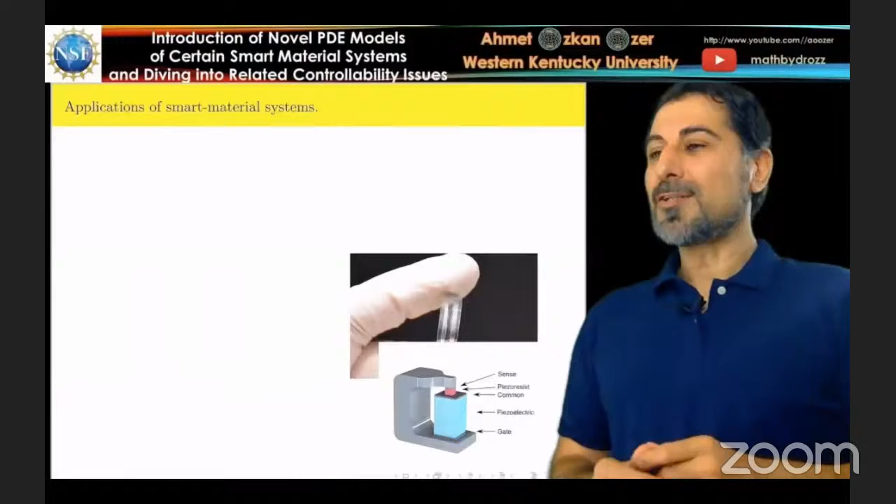The second example I want to share with you is the piezoelectric transistor developed by the Watson Research Center at IBM. It works on a novel principle. Essentially, you apply the electrical input that is converted to an acoustic pulse by the piezoelectric element here.

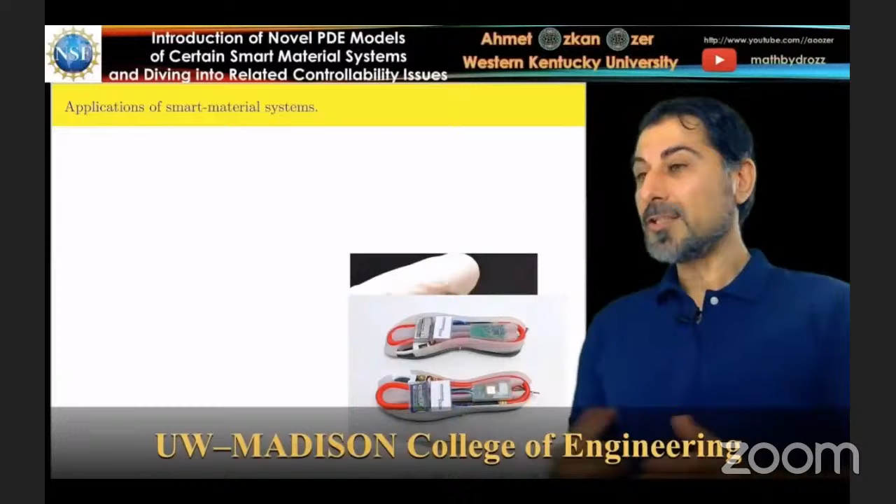Here is another application of piezoelectric smart material systems. We have a shoe sole with an embedded energy harvester with the battery and electronics, all integrated in each sole. When you walk, this harvester is going to harvest energy and power up certain electronics needed. This is developed by University of Wisconsin-Madison researchers, and in fact it's a startup company.

All right, here's the outline of my talk. In the first part, I'm going to focus more on the modeling aspects of piezoelectric beam models, and these are novel beam models. Hopefully some of you would be interested in working on those models in the future. In the second part, I'm going to talk about the controllability and stabilization results, recent results.

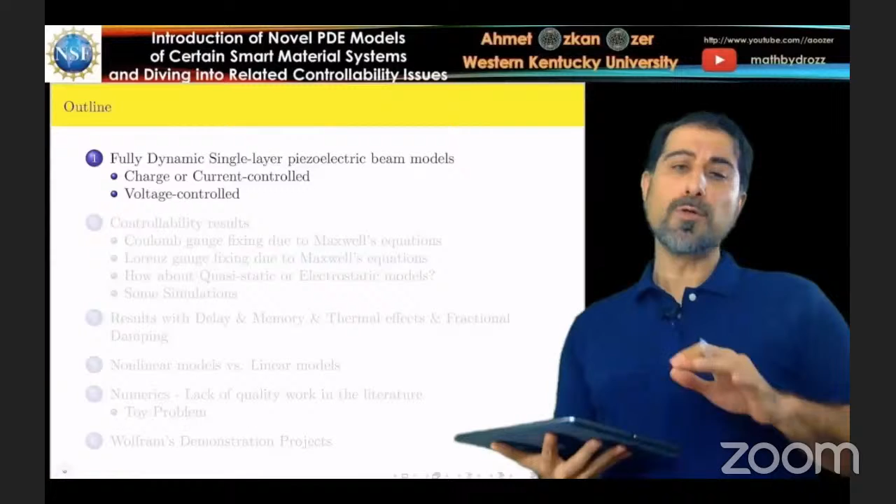In the third part, I'm going to talk about different scenarios where we have a delay in the feedback controller, or memory in the material, or thermal effects added to the game, or fractional damping added. In the fourth part, I'm going to work on nonlinear models when you assume large displacement assumptions, so we have nonlinearity added to the PDEs, and I'm going to compare that to linear models.

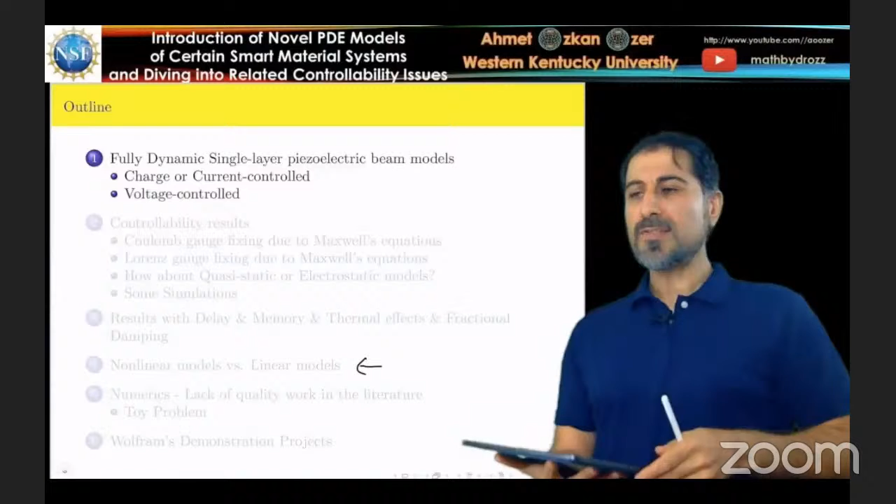And I'm going to talk about some numerics that I have been recently working on. Hopefully, if time is left at the end, I'm going to talk about the Wolfram demonstration projects that I have been working on in the last 2 years with my undergraduate students. Two of our works are already published at the Wolfram site. All right, let's get started.

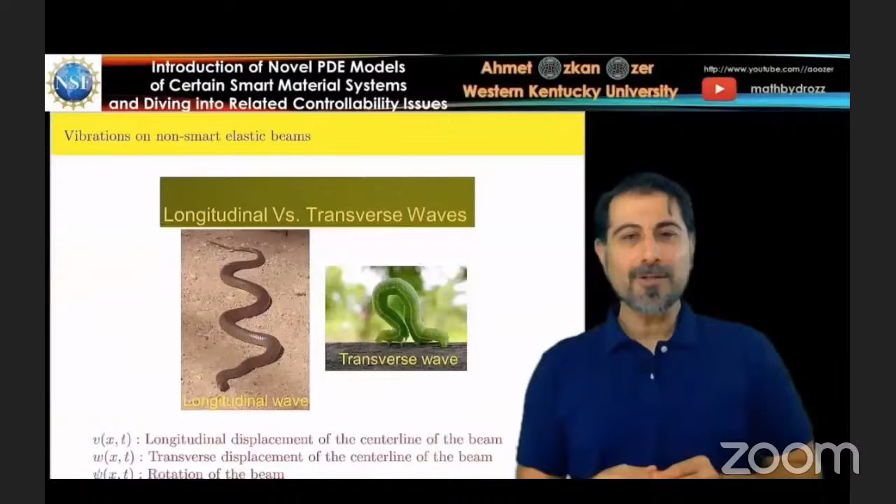Let's first talk about vibrations on non-smart, simply elastic beams. We have three major variables. V denotes the longitudinal displacement of the center line of the beam; it's essentially the stretching type motion. W represents the transverse displacement of the center line of the beam, which is essentially the bending motion. And psi is the rotation of the beam. From this moment on, dots are going to represent time derivatives and primes are going to represent space derivatives.

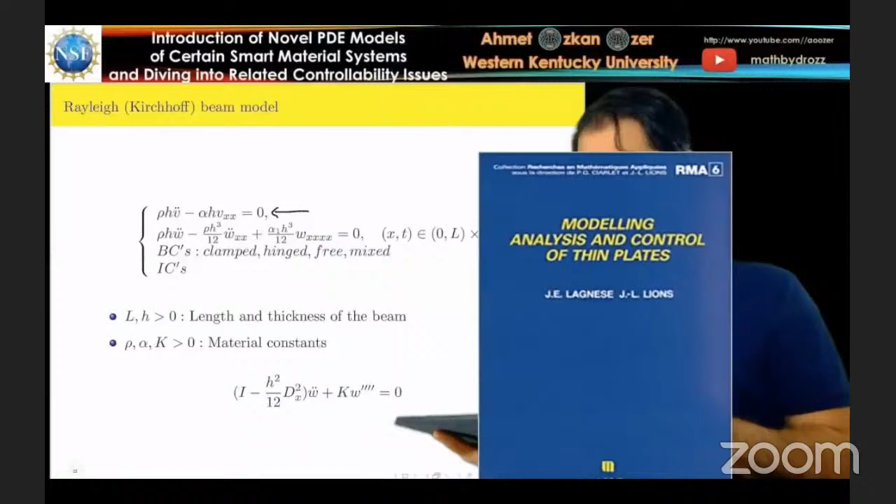All right, let's start with the Rayleigh beam model, or so-called Kirchhoff beam model. We have one equation, one wave equation in fact, describing the longitudinal type motion, and you have the beam equation here representing the bending motion.

These are completely decoupled because we're using the small displacement assumptions. In other words, we're using the linear theory, and we have boundary and initial conditions of your taste. This is a beam of length L and thickness H, and we have material constants, completely positive.

The W equation can be rewritten in this form, and you have this differential operator applied to the second time derivative, and this brings extra difficulty in terms of controlling these beams. This difficulty is just because of the rotational inertia term that I'm circling out over there.

So that term is simply discarded in engineering applications, which takes you all the way to the so-called Euler-Bernoulli beam model. So the only difference is that you have no rotational inertia term here. There's another model you may have heard of, called the Mindlin-Timoshenko beam model.

So essentially you have a bunch of wave equations representing the longitudinal bending and the rotation of the beam. These are all coupled, and you have the same type of positivity for the constants, as you can see.

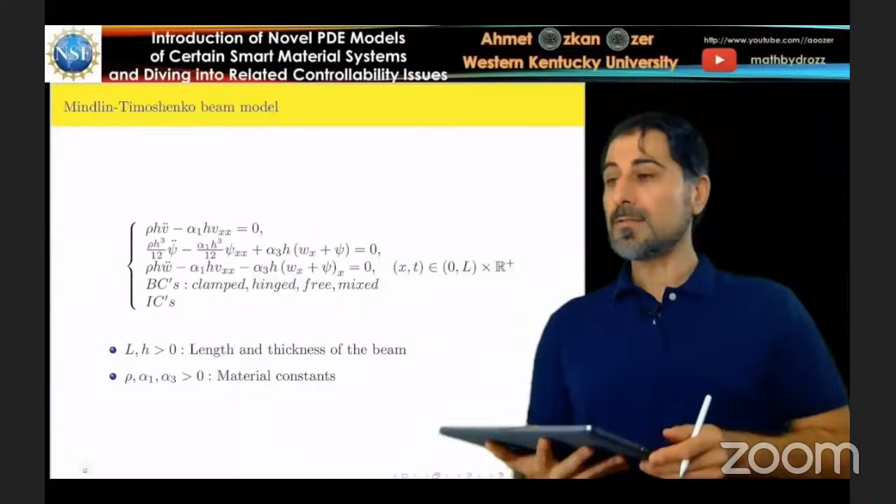Now I want to talk about the smart elastic beam model. So you have a piezoelectric beam model, which is essentially an elastic beam having electrodes at the top and bottom. If you connect the electrodes to a circuit, you can start supplying voltage, charge, or current to the electrodes, and depending on the amount and the type of the electrical charge, you can actually shrink or extend this beam. And in fact, the opposite direction can also happen.

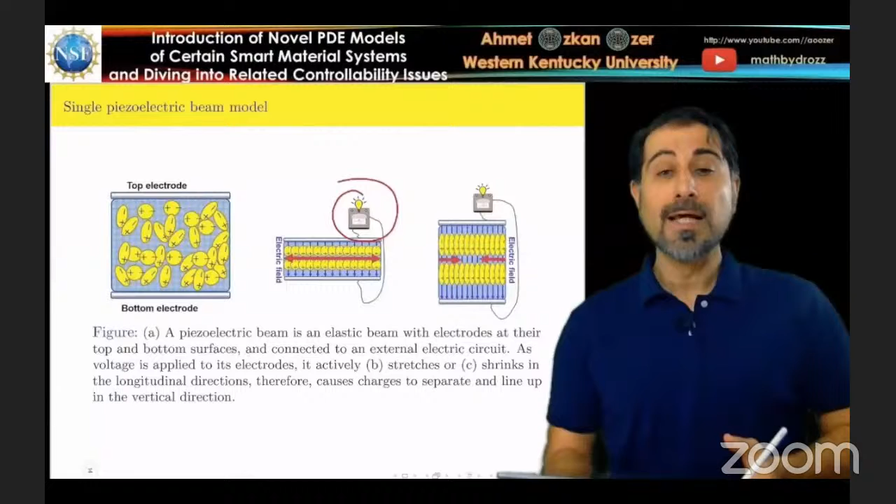So you can actually compress these materials or apply external force to generate electricity, so that these materials are used as actuators and sensors. After introducing the piezoelectric beam here, my research just starts here.

Now there are a lot of questions coming up. How do we actuate these beams? Are we going to supply voltage, charge, current, or even mechanical force? Remember that when you apply force on the piezoelectric beam, we generate electricity. So what is the best actuation?

There are some answers for that. Traditionally, piezoelectric beams are actuated by voltage. Why? Because it's easy to implement, you have simpler circuit design, and it's cheap—that's a great advantage. And if you look at the pioneers in the field, including NASA, they all use piezoelectric beams actuated by voltage.

And how about the choice of models? Should we go finite or infinite dimensional models? Can we use basic circuit models, RLC type? Are we supposed to use linear or nonlinear models? How about the electrical hysteresis?

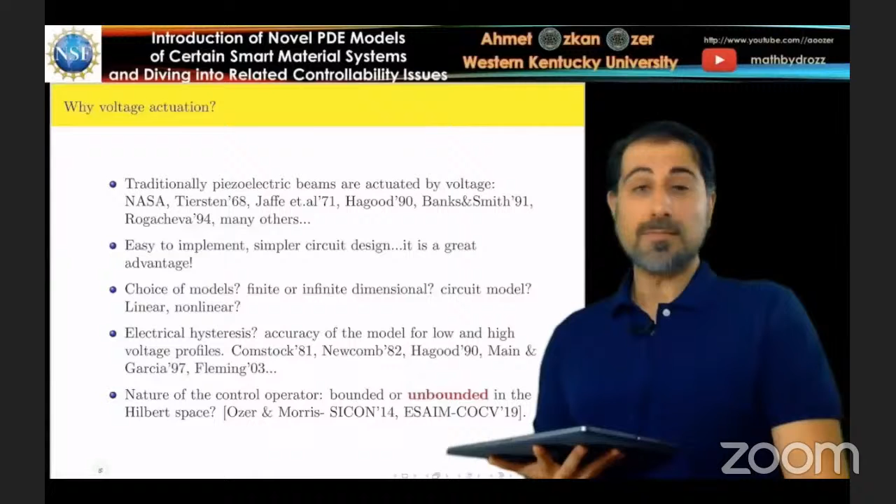So essentially, this is the electrical nonlinearity that happens to a material. There's also mechanical hysteresis—lots of hysteresis are observed, especially when you actuate these materials by voltage. And how about the nature of the control operator? Because we're all doing control theory of PDEs.

So are we supposed to have bounded or unbounded control operators in energy space, essentially? This is also another question we have to ask ourselves, because in certain cases you have bounded, in other cases you have unbounded control operators. That depends on the choice of the electrical input.

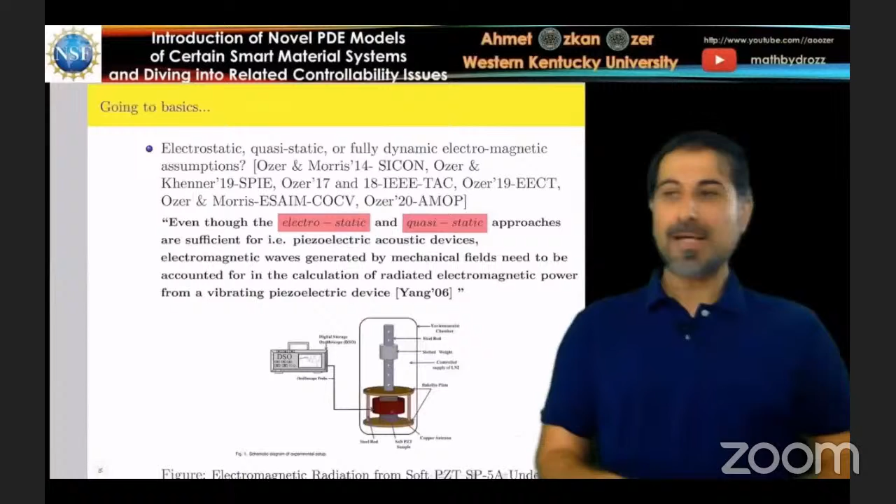On top of all these questions, there's another question we should elaborate on—we have to go to the basics. How are you going to model the electromagnetic effects? In fact, how do you model the interaction of the mechanical vibrations with the electromagnetic effects? Because piezoelectric materials are sort of combining those effects.

So at best, you can go with Maxwell's equations for the electromagnetic portion of the modeling, but then you have three different assumptions: electrostatic, quasi-static, or fully dynamic. I was reading Yang's book, and he has a very good quote here: even though the electrostatic and quasi-static assumptions are more than sufficient to describe the vibrations in certain devices...

...in practice, there are some other devices, like piezoelectric acoustic devices that you can see in the diagram here, where electromagnetic waves are generated by the mechanical fields, and these are supposed to be accounted for. If you use the electrostatic or quasi-static assumptions, you completely ignore those electromagnetic effects. Essentially, you have to incorporate these effects in your model by adopting the full set of Maxwell's equations.

There's also another paper by Yang, published in 2017, where he talks about the fact that at present there is only limited understanding of the electromagnetic effects generated by acoustic vibration, because of the complexity of the electromagnetic effects being blended with mechanical vibration. So even though for certain devices it's known that these effects are very major, people—especially engineers—choose to discard those effects because of the complexity they add to the modeling process.

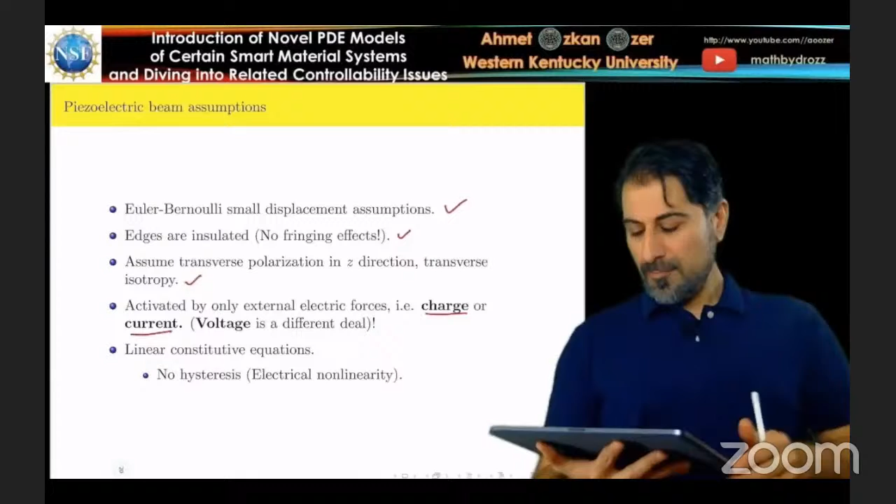And voltage is a totally different deal. I'll show you the model for the voltage, but it's a different deal. And we're going to use a linear constitutive equation, so we're going to have a linear model essentially.

Here's the full set of Maxwell's equations coming along with boundary conditions. I'm going to use either charge applied to the electrodes type boundary condition or current applied to the electrodes. You can also apply voltage, as I said, but that causes a lot of hysteresis. Electric potential being equal to voltage is the boundary condition corresponding to that, but I'm not going to consider this during the modeling process. I'm going to show you the model if you assume the voltage boundary condition.

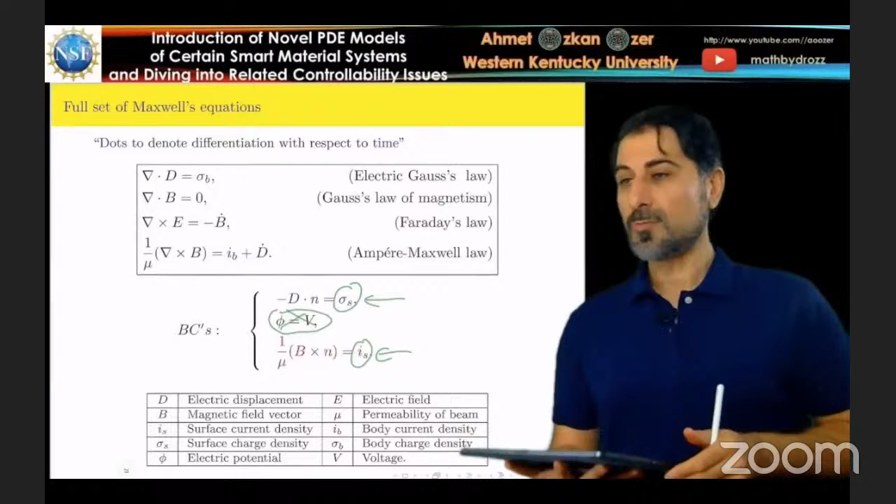Here is also the assumptions that I mentioned earlier. So are we going to use electrostatic, quasi-static, or dynamic? Let me just quickly explain what electrostatic means.

So you have the magnetic field and the time derivative of the electrical displacement, body current or body charge completely discarded. And here the electrical field is the negative of the gradient of the electrical potential.

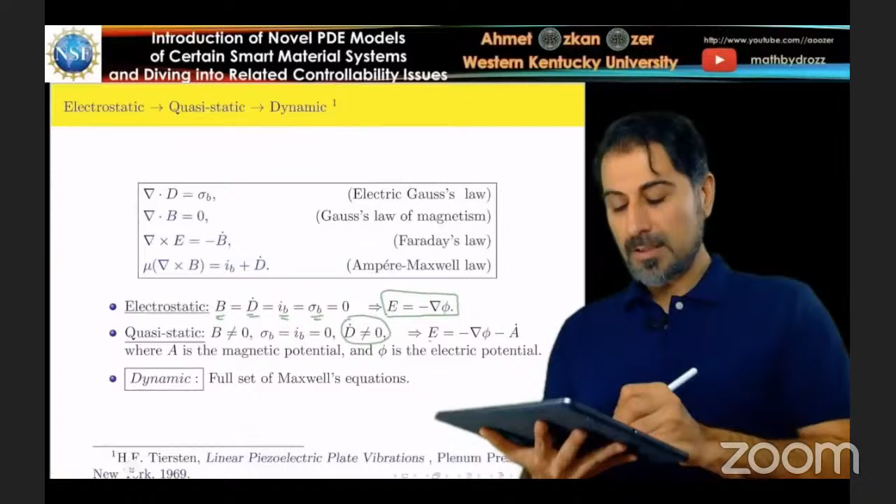And you can use quasi-static. Here the magnetic effects are not completely discarded because the time derivative of the electrical displacement is essentially not equal to 0. And even in this case, you can write E in this form, negative of the gradient of the potential minus the time derivative of the magnetic potential.

And what we're going to do here is we're going to assume the fully dynamic model. That means I'm going to use the full set of Maxwell's equations to start with. But I just wanted to show you the differences between all 3 assumptions here.

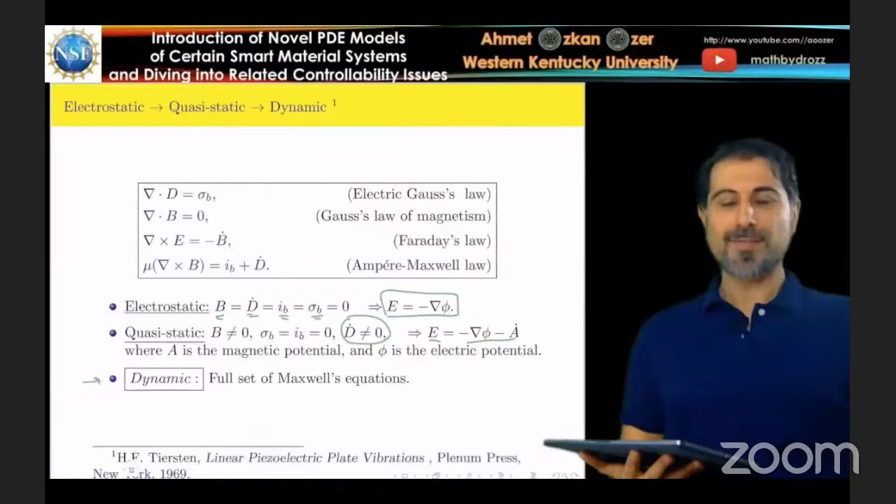So after adopting the full set of Maxwell's equations, we need to know how the stress and strain are related to electrical displacement and electrical field. This is a well-known linear constitutive relationship.

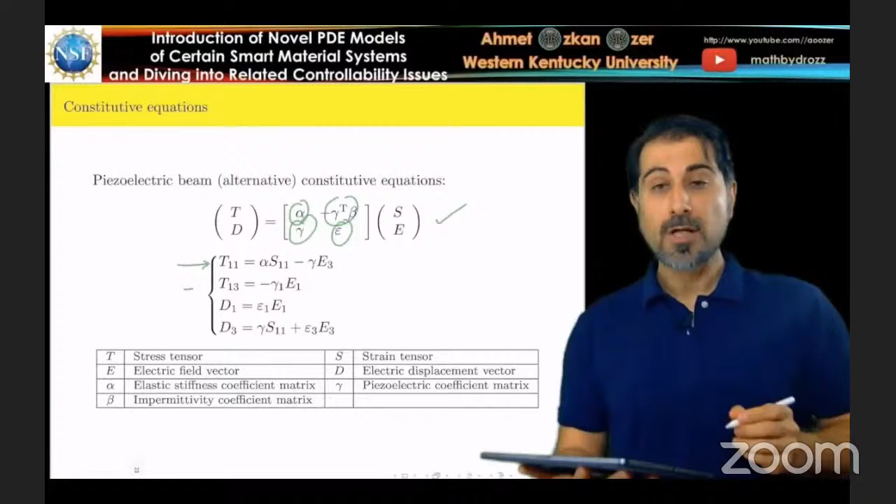So these are all, by the way, matrices, sub-matrices, but essentially stress and strain have 6 components. But we're going to only assume, since we're using beam theory, the stress in the x direction, and then the stress in the z direction. And we also have the electrical displacement in the x and z directions.

So now we know how stress and strain are related to the electrical displacement and electrical field.

All right, we have the final assumption before we wrap everything up. We're going to assume that the electrical potential and the magnetic potential are quadratic through thickness. Briefly, this is for involving the induced electrical field effects.

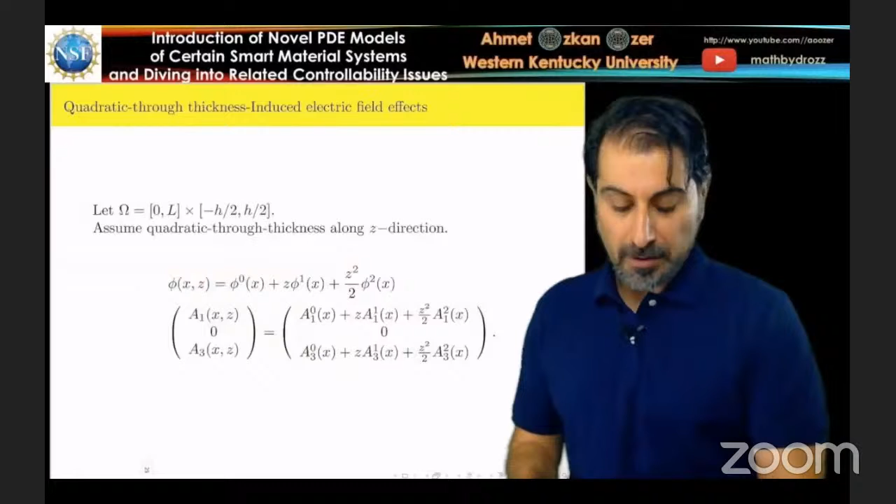So what we're going to do next is write down the Lagrangian. We're going to write down the kinetic energy, potential, electrical, magnetic energy, together with the work done by the external forces. This is represented by W.

We only assume that there is just charge, applied charge or current to the electrodes, and we have the surface continuity conditions, and we have all pieces of the electrical and magnetic fields to be our admissible displacements, and we also have V and W, longitudinal and bending motions.

And if you wrap everything up with better notation, we have a set of stretching equations. There's also another set for the bending equation, but since the current or charge control do not affect those, I don't mention them here. One catch here is that the top equation is the wave equation describing the stretching of the beam, the mechanical vibrations of the beam.

And you have the second equation for the electrical potential. As you see, charge comes into the game together with the Dirac delta operator. So you have a boundary control.

And if you assume the electrical current as your input, you can see that this is a nice Heaviside function. So it's a bounded controller popping in for the very first component of the magnetic field.

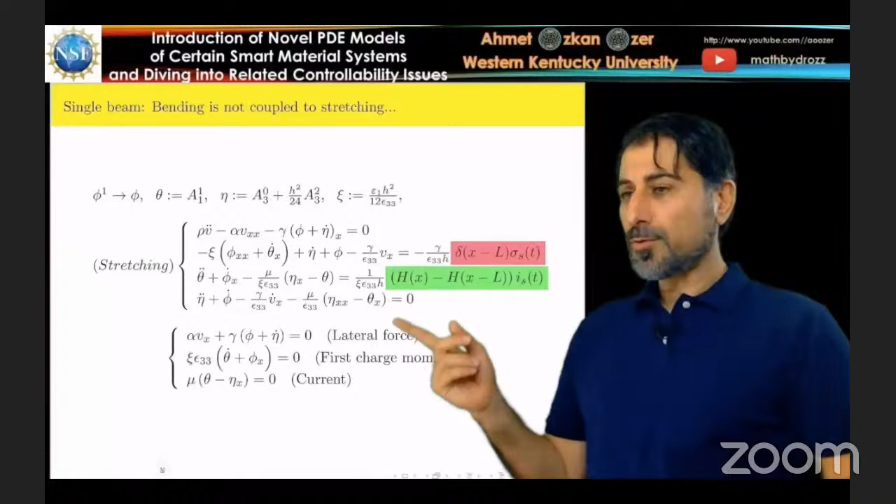Here we also have the boundary conditions: lateral force, first charge, moment, and current. These are natural boundary conditions. And next, there's simply no way to use the current in the variational approach if there is no magnetic effect.

So this is the importance of adding a full set of Maxwell's equations here. And the bad news is that the system is not well posed. Essentially, the Lagrangian is invariant under certain transformations. You can find the details in those papers.

And what is the remedy here? If you worked with Maxwell's equations involving all the electromagnetic potentials, you have to rely on a certain gauge. It's called gauge fixing, to make the system well posed. But there is also the physics meaning of choosing a gauge. Essentially, if you use a Coulomb gauge, you assume that electromagnetic waves travel at infinite speed. And if you use the Lorenz gauge, electromagnetic waves travel with finite speed.

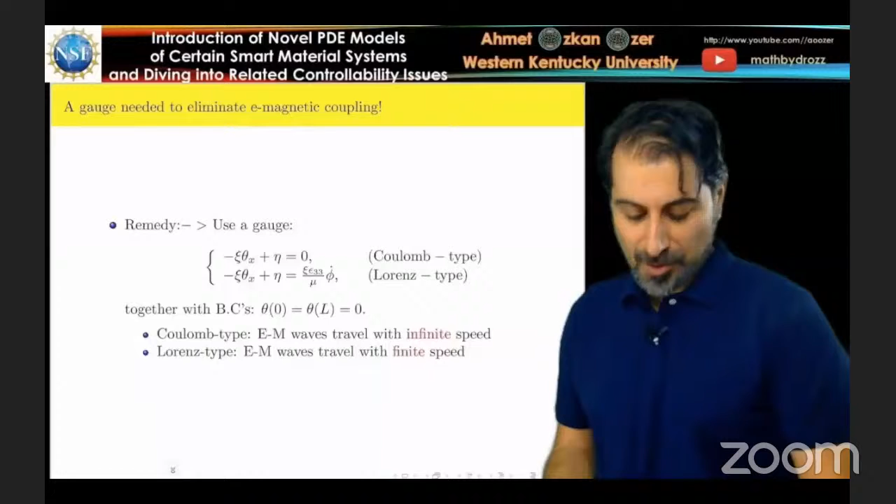So what is the reflection of that in the modeling or in the PDE here? If you use the Coulomb gauge, this circle term is going to be 0. So that's going to make the electrical potential equation not a wave equation, but just an elliptic equation that you can solve for phi.

And in fact, if you solve that for phi, let me show you what you got here. So defining this P xi operator, the inverse of this differential operator, you can eliminate the phi equation. So you have all wave equations here, and the phi equation is blended in through the other equations. So you have the charge, as you see popping up here with the Dirac delta operator as it was before, and you have the Heaviside function coming along with the current control.

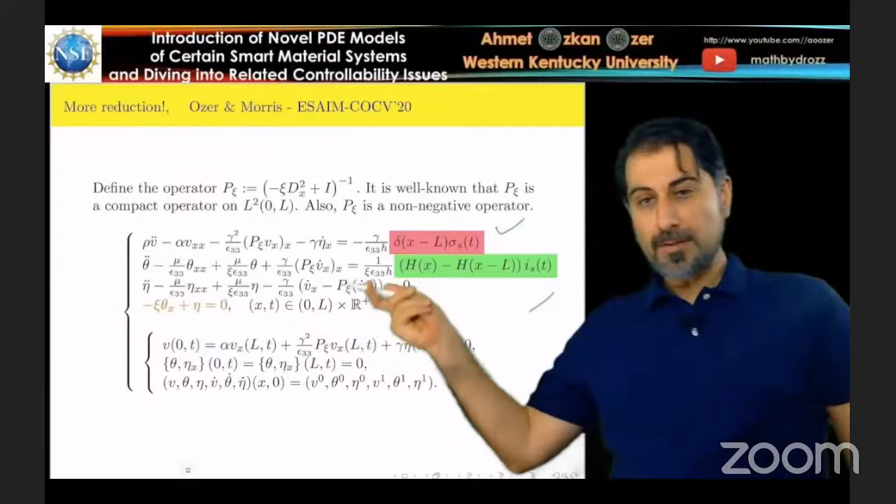This tells us that charge control is an infinite dimensional control, or in other words, an unbounded type controller, let's put it that way, in energy space. And the current control is bounded because it's just popping up as a nice Heaviside function on the right hand side of the equation. The Coulomb gauge here is also blended into those equations, and it's an extra equation that you have to always keep in mind, especially when designing the energy space.

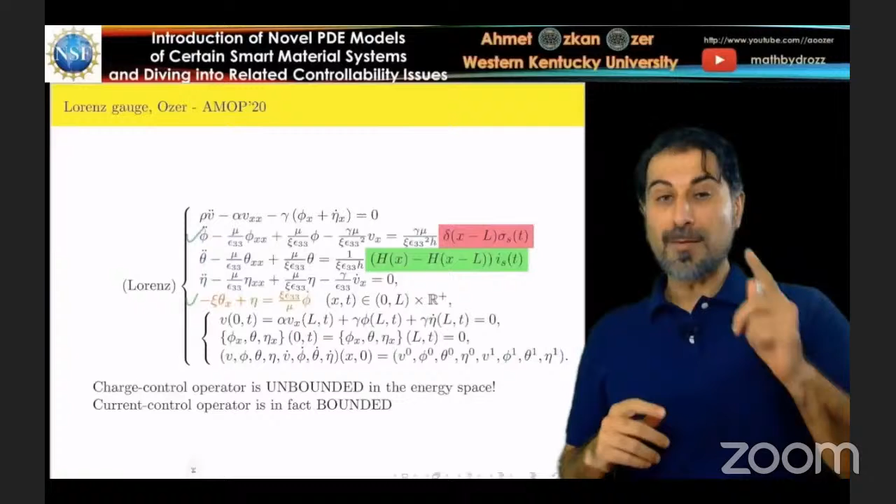And what happens if you use the Lorenz gauge? Well, then we're going to have a wave equation for the electrical potential as well. So there's one more equation, and here is your Lorenz gauge added extra to the equation. The deal is the same in terms of boundedness or unboundedness of the charge or current control operator. So you have the charge control unbounded and the current control bounded.

So far we only talked about a single piezoelectric beam, and there are other models, obviously 3-layer designs where the piezoelectric beam is one of the layers, or even multi-layer designs, but because of time limitation, I can't talk about those. I'm going to put a link down in the YouTube video so you can actually check those models if you're interested.

All right, let's change gear a little bit. I'm going to talk about the controllability results for the Coulomb gauge and Lorenz gauge models, and I'm also going to talk about the quasi-static and electrostatic cases.

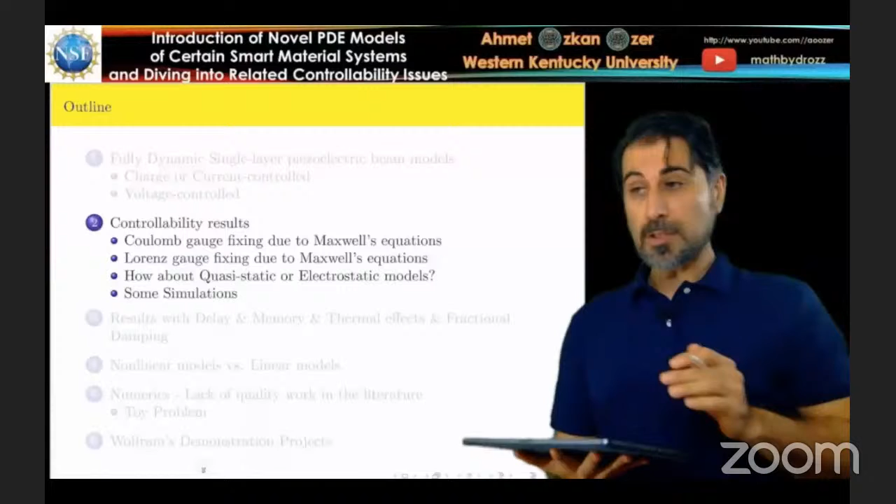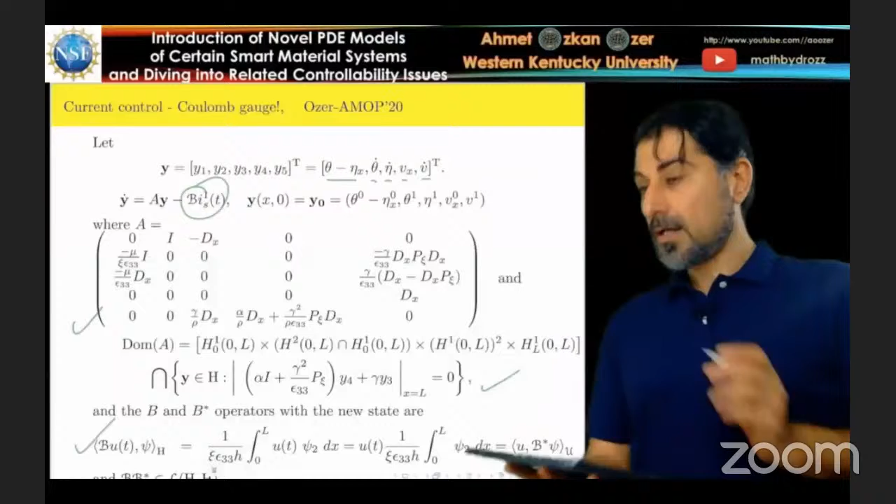States are going to follow the energy description here, so we're going to define those states, 5 states. And here, as you see, the current control comes into play like this. By the way, I'm just talking about the current control at this moment when I write down the state space formulation. And we have this matrix A, and we have the domain that also involves all the boundary conditions and the Coulomb gauge, and you define the control operator and the observation operator, which is B star.

B star is going to be our measurement. All right, here are some technical results. If you're interested, you can check the paper.

The most important part here is that with the choice of H, we can show that A star is exactly equal to negative A. We have a unitary semigroup, and we have the well-posedness result in H.

Right now, we're looking at the time derivative of the energy, and we can observe that this is current times the integral term over there. That integral term corresponds to B star feedback, and what we do is just feed it back into the state space formulation, and that B star is very physical. In fact, that's the magnetic current in the X direction.

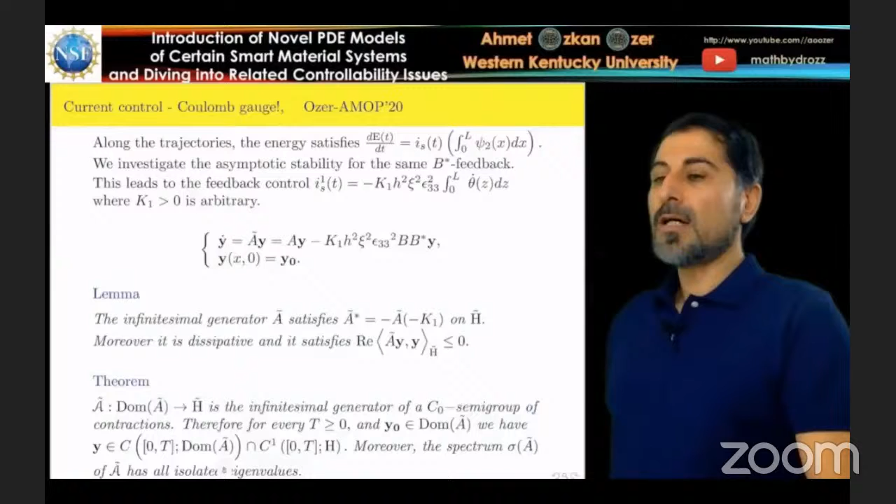So we have a dissipative system, and the closed loop system is in fact well posed. And we have all isolated eigenvalues. All right, now we have a well-posed system.

It's time for proving the lack of stabilizability. And for real tau, we define all of these constants A, B, C written in terms of the material parameters. And we have A1 and A2 written in terms of A, B, C.

So we have a very technical result, and if you're interested, please refer back to those papers here. So you have, if A1 and A2 are of special forms, 2m pi over L, 2n pi over L, m and n are integers, and m squared plus n squared is strictly greater than that constant here, then we have the lack of asymptotic stability.

In fact, in the engineering literature, it's the minimum you ask for when you talk about stabilizability. And we went further and proved that the system A, B, with B being the control operator, is not asymptotically stabilizable, not just by B star feedback, but by any other bounded state feedback.

And it's just because the current control produces a bounded control operator, and there's no way to push all the eigenvalues to the left half plane, which is pretty much expected. And we use Benchimol's theorem to prove it.

And how about the charge actuation? I didn't want to go through the details of that in terms of the state space formulation, but if you use the B star measurement, in other words, that's totally mechanical.

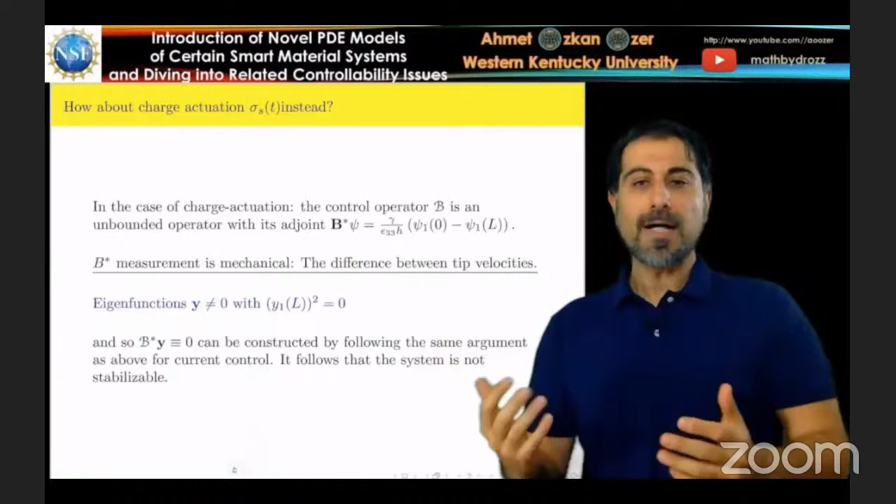So you're talking about a piezoelectric beam, so you should normally control an electromagnetic quantity and measure the same way, but if you go with charge, you in fact have to measure something mechanical, which is the tip velocity, to show that you have the same type of lack of stabilizability result.

And how about the Lorentz gauge? I would just say that the setup is pretty hard. And again, if you're involved in Maxwell's equations with the potentials, proving well-posedness for a Lorentz gauge is a big deal. I worked on this problem for a long time, but eventually I got it published, and it's well-posed.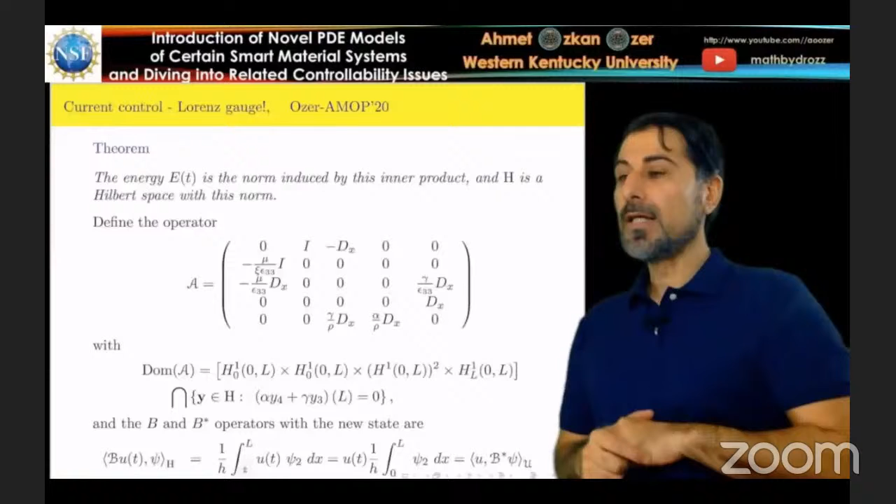But you have to redefine your state, and you have to sort of convert the Lorentz gauge into a Coulomb-like gauge, and you define the inner product and the space accordingly. I'm going to skip those details here, but just show you that B star is also calculated through that.

We have the well-posedness result with the new state. In fact, we had to embed the new Coulomb type gauge by converting the Lorentz gauge into our Sobolev space. And again, that was quite technical, so please refer back to my paper here.

And similar to the Coulomb gauge model, you can define A, B, C, and you can prove a very similar result of the lack of asymptotic stability. And in fact, there's no way you can stabilize this model by any state feedback.

Okay, how about the electrostatic or quasi-static cases? In fact, that's pretty interesting, because if you don't assume the full set of Maxwell's equations, life is so easy, because you have a single wave equation, as you see here, and it's controlled by the charge controller.

Or you can use the circuit equation, as you see that the time derivative of the charge is the current, so you can actually use those separately, and you can easily prove that both models are at least asymptotically stable, but obviously the model controlled by only charge is exponentially stable.

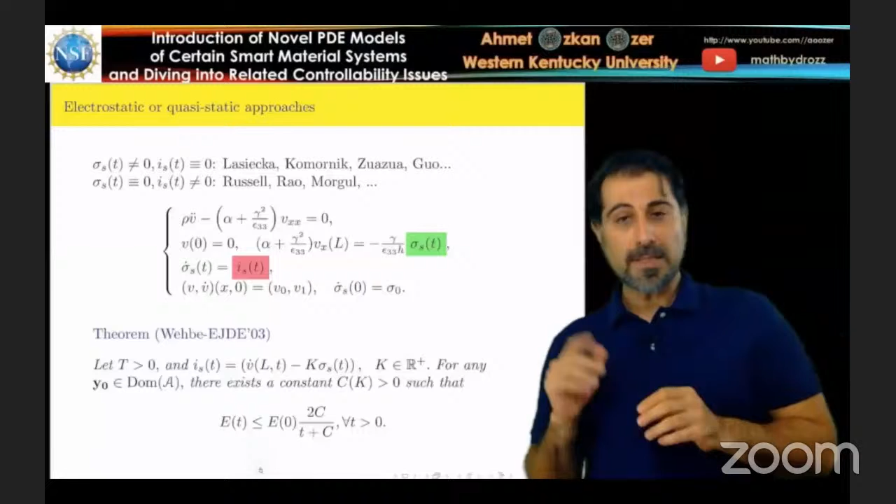And you can refer back to this result of Wehbe for the polynomial stability in the case of current. Remember, in the fully dynamic case, we don't have the stabilizability, but here we have at least some sort of stability, which is good in terms of practical purposes.

And this table sort of summarizes everything that we have so far. You can go with electrostatic, quasi-static, or dynamic assumptions of the Maxwell's equations.

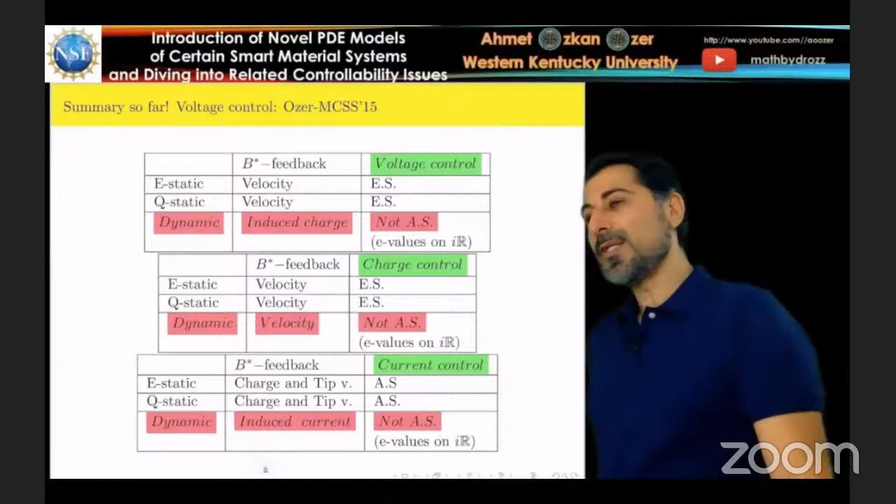If you go with voltage control, you measure the induced charge, and it's not asymptotically stable. But if you go with electrostatic or quasi-static assumptions, everything is good—you even have exponential stability. In charge control, it's the same deal: with dynamic approaches, you don't have asymptotic stability. This lists all the weirdness coming along with choosing different assumptions in the modeling process, and in terms of control, you have all different types of controllability or stabilizability results.

All right, let's change gears a little bit. In this part of the talk, I'm going to mention related results involving certain other physics into those PDEs.

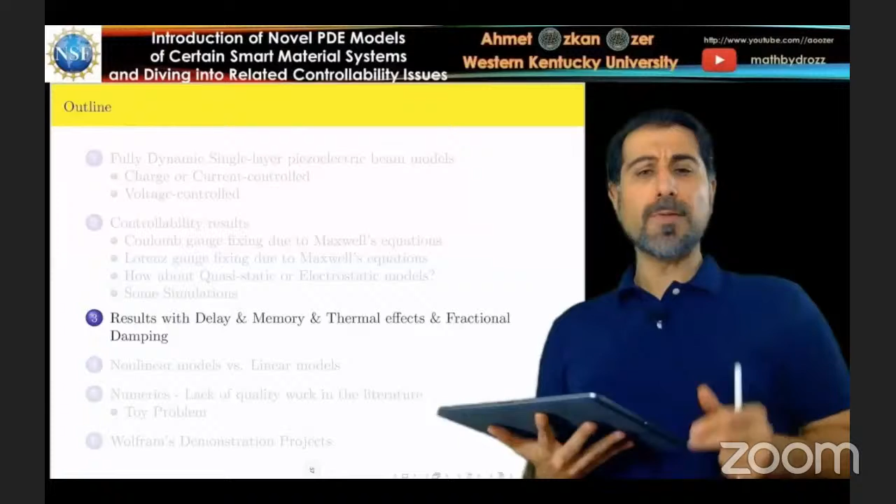All of these models are novel, and that's why we wanted to analyze them with delay, memory, thermal effects, and fractional damping. The slides I'm showing won't contain mathematical results since this is submitted work, but it may give you an idea of what problems I've been working on. You may add different types of delays—distributed delays, or delays in the mechanical boundary condition or the charge boundary condition—and analyze what's at stake in terms of stabilizability. Time delay is important, because even a small perturbation delay in the output measurement causes instability. We submitted multiple papers involving these different types of delays.

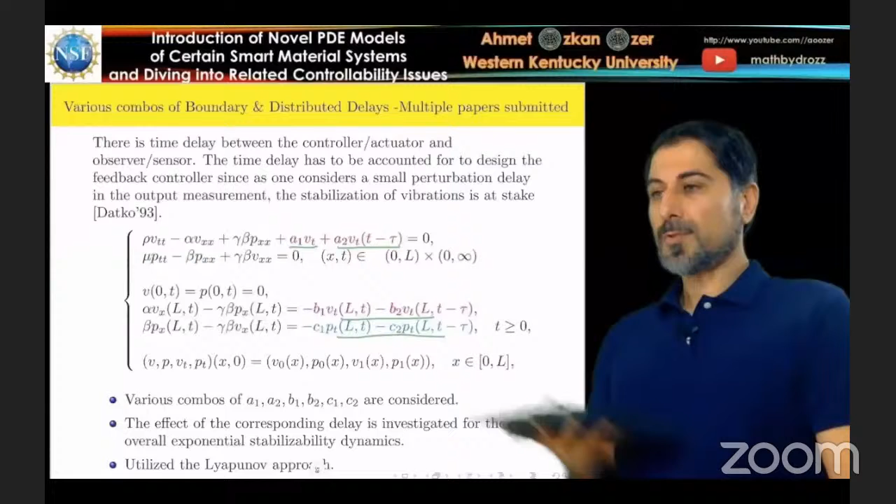We got really nice exponential stability results following certain papers and results in the literature, and we utilized a Lyapunov approach for this type of model specifically. This is a model corresponding to the voltage control case, and for current charge control, this type of delay was never studied before.

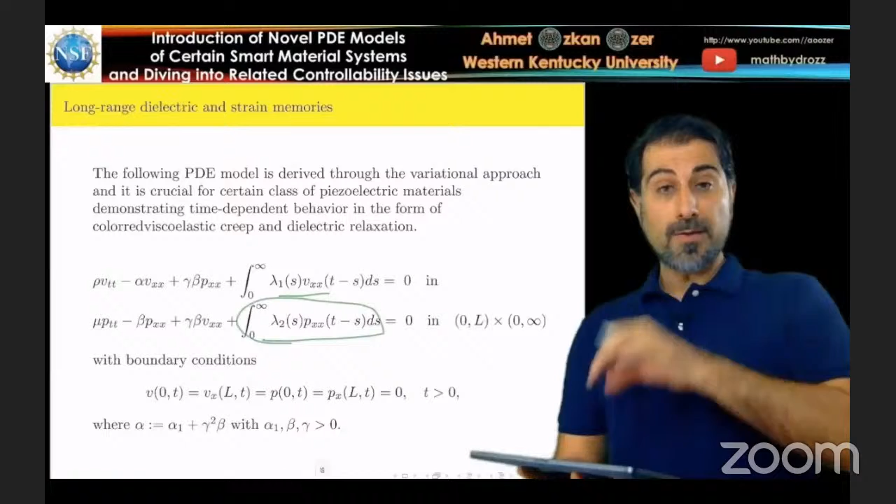Next is how about adding memories to each equation—so you have the mechanical memory, and this is an interesting behavior. We know the elastic memory, but we don't know much about the creep or dielectric relaxation, and you can't really find models in the literature addressing that in the infinite dimensional setting. So this part of the model is very important—this was never studied before with this much rigor blended into the PDEs.

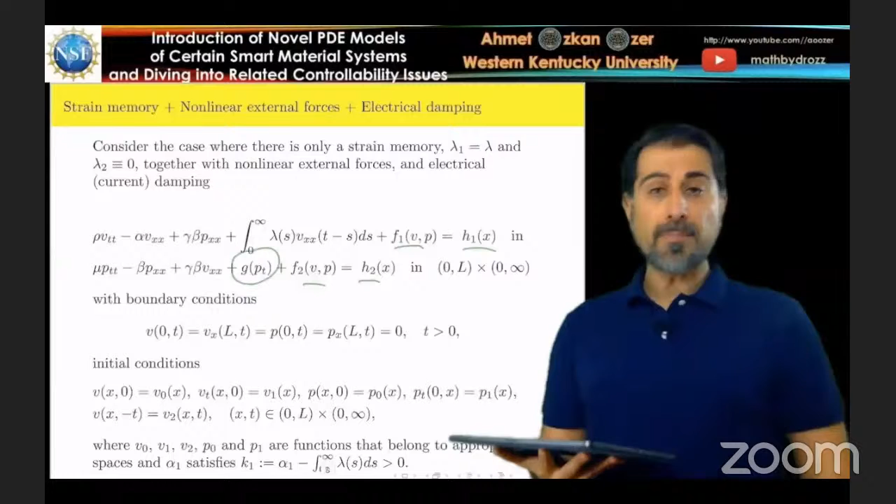This is another problem we worked out. There are different versions of it, but we added external forces, source terms, and some kind of electrical damping into one of those equations. We proved, under certain conditions, that the dynamical system associated with the solutions of the system allows us—using quasi-stability theory—to get the existence of global and exponential attractors. Again, this model has never been considered in the literature due to the existing complexity of the PDE models for piezoelectric beams. This is the first attempt at adding the memory term into the piezoelectric beam equations.

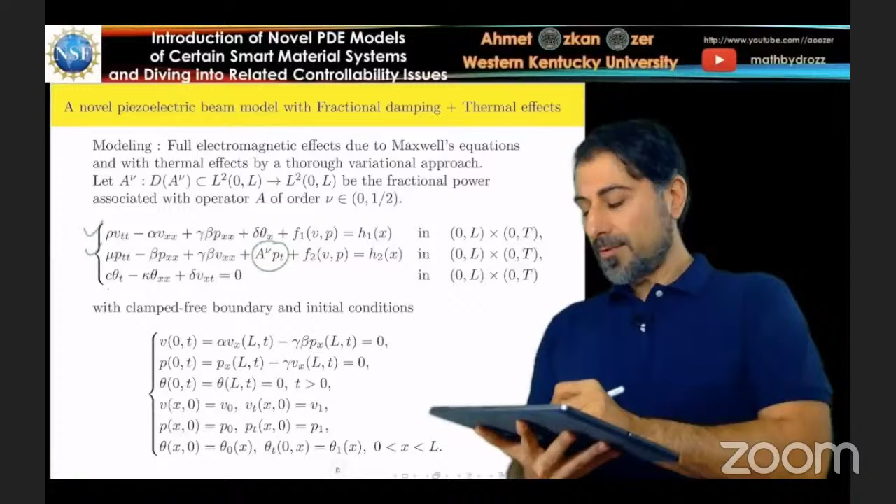And what if we have fractional damping and thermal effects? This is also not studied at all. We essentially took the piezoelectric beam model actuated by voltage, added fractional damping and magnetic damping into the P equation, and added thermal effects coupled to the piezoelectric beam equations. We proved a lot of stuff here—this is a long paper, by the way.

We studied the long time dynamics and proved that the dynamical system generated by the system has a smooth global attractor with finite fractal dimension, via quasi-stability theory. We got the existence of the exponential attractor and a global attractor under perturbation of the fractional exponent. This is also a joint work—we submitted it, and it's under revision, so I can't share all the details, but I can briefly explain what is accomplished in the paper.

In this part of the talk, I'm going to mention nonlinear models. I'll only consider the voltage control case to show what's going on. Before I start, I want to point out that nonlinear effects are crucial in modeling because they explain certain behaviors, especially for energy harvesting purposes, so these effects should be accounted for.

When I started modeling this, I wanted to use large displacement assumptions due to Mindlin and Timoshenko, and Euler-Bernoulli. For the electromagnetic effects, I involved everything due to Maxwell's equations. If one wants to get down to a quasi-static or electrostatic model, there's a way to eliminate certain variables to get down to PDE models for those cases. When I looked at modeling papers producing distributed parameter models, I can highlight the work of Kugi and Schlacher—they interestingly got a bilinear control system very similar to what I got here, but they assumed electrostatic assumptions.

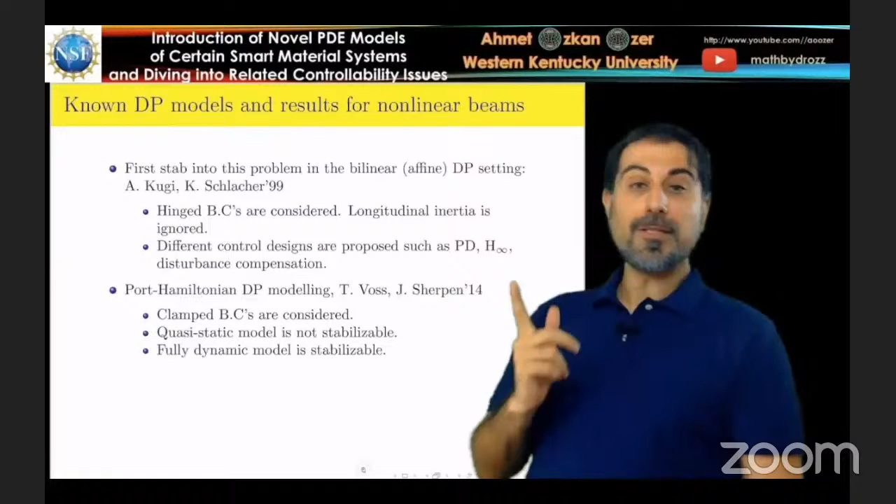They got hinge boundary conditions, and the longitudinal inertia term is sort of ignored. That's pretty interesting because involving nonlinearity, one observation is that the longitudinal motion is strongly coupled to the bending motion. So if you discard the longitudinal inertia and design the controllers, that's a big reduction. And there was another paper by Voss and Sherpen.

They used clamp boundary conditions, and they showed that with only one controller, the quasi-static model is not stabilizable. With two controllers, the fully dynamic model is stabilizable. This is a good result because this is the most rigorous paper I have seen so far involving nonlinearity.

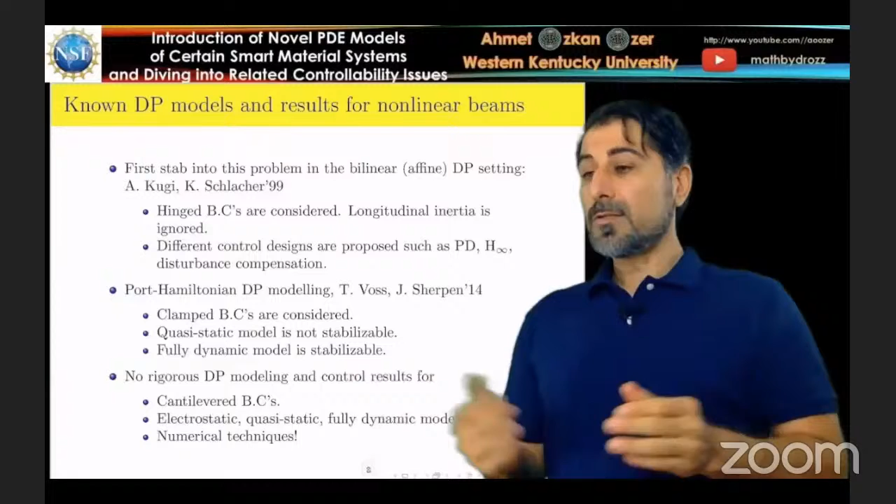Unfortunately, there are no other distributed parameter modeling and control results for cantilevered boundary conditions involving electrostatic, quasi-static, and fully dynamic models. Because of the time limitation, I can't show you everything. I will only show you the electrostatic case here, just to show you what's going on.

This is a very novel model. You probably haven't seen this model anywhere. Please check this out if you're interested.

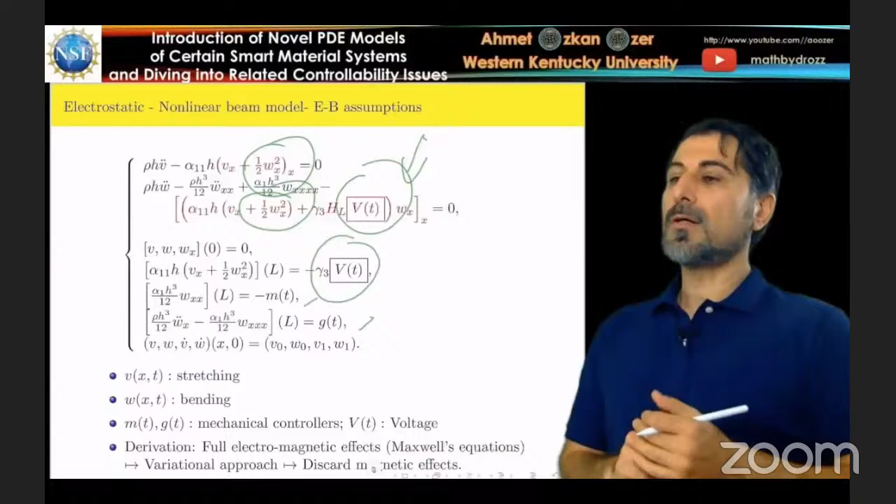What we did here is that we also added some controllers, moment and shear, transverse shear controllers for the bending equation. So how do you stabilize even the electrostatic case?

Well, we look at the B-star type feedback, and that B-star type feedback is interesting here. So you have the tip velocity, and you have the time derivative of the integral of Wx squared. That's an important term. That's the effect of nonlinearity, coupling the V and W equations.

And we choose classical B-star feedback controllers. You have a dissipative system, but essentially this part is important because the tip velocity could be the negative of this component, so that could zero all the effect of the feedback for the voltage. So you're going to eliminate that case.

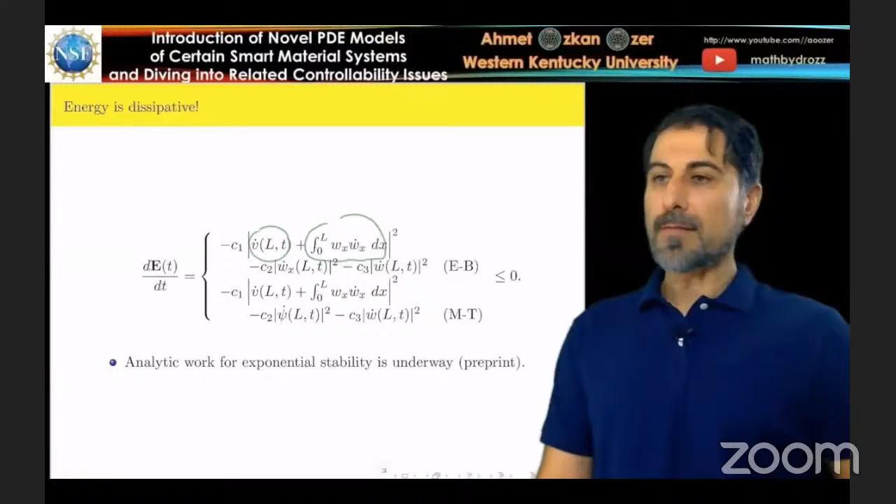So that means there are some other non-trivial equilibrium points going on here, and the analytic work is underway with collaborators, and I can't show you the results here because of the same reason.

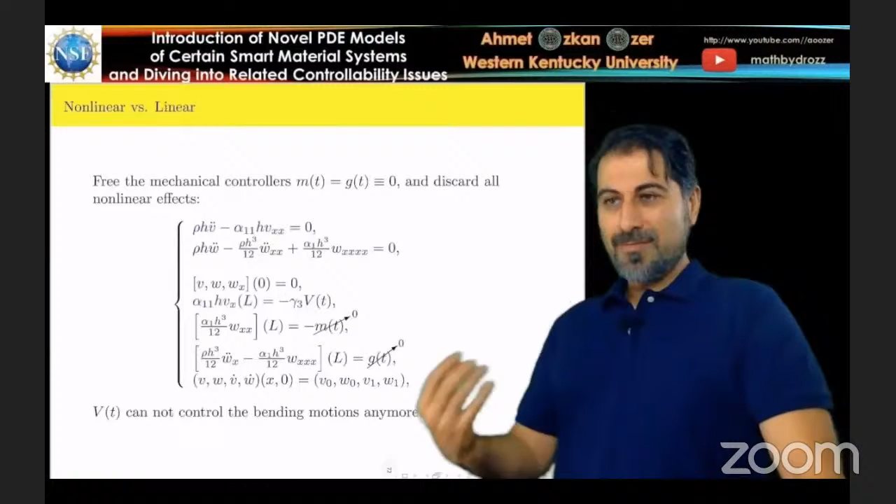So if you free the mechanical controllers and discard all the nonlinear effects, you have a perfectly decoupled equation, as you see that the voltage only controls the longitudinal motion but not the bending motion. So again, nonlinearity is important because voltage affects both stretching, longitudinal motion, and the bending motion altogether.

And if you consider the Euler-Bernoulli model, not the Mindlin-Timoshenko, you can put it in the state-space formulation. By the way, you can choose the classical states to start with, but there's also different choices of states. For example, I can change this to V sub x, 1/2 Wx squared. So I got a different state space formulation, and I can prove different results for that.

But we prove that this system here is a nice boundary control system. One of the catches here is that the voltage control pops here in a bilinear way. This was the observation in Kugi, and we got the same observation here.

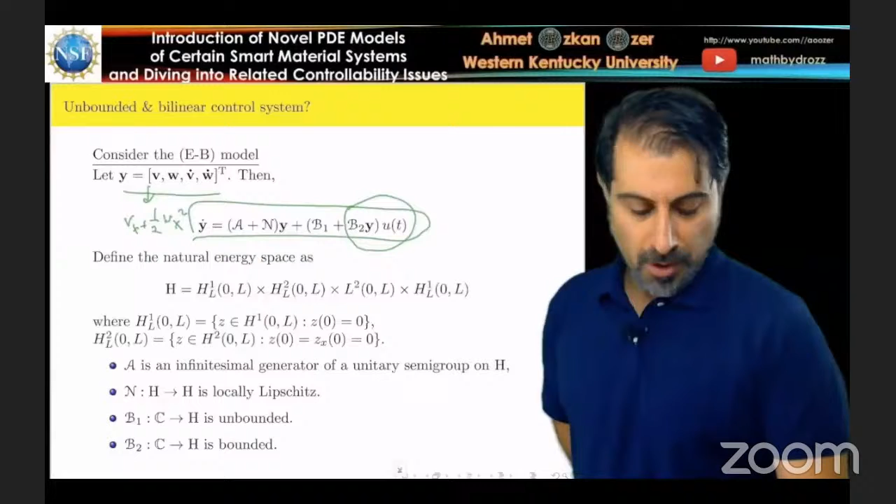Again, there's not much work done for this type of systems. And if you're interested, this could be an interesting mathematical problem. We already started working on it, and we got some preliminary results, but I can't share those with you at this moment. But there is a lot of open problems here.

So we proved the well-posedness and exponential stability, it's sort of proved. It's a preprint right now. Different combos of boundary feedback and distributed damping are in consideration right now. So if you're interested, we can do some joint work in the near future.

And we got the numerical work, which I'm going to show you in a little detail here, but there's supposed to be lots done in the near future. So again, if you're interested, please contact me.

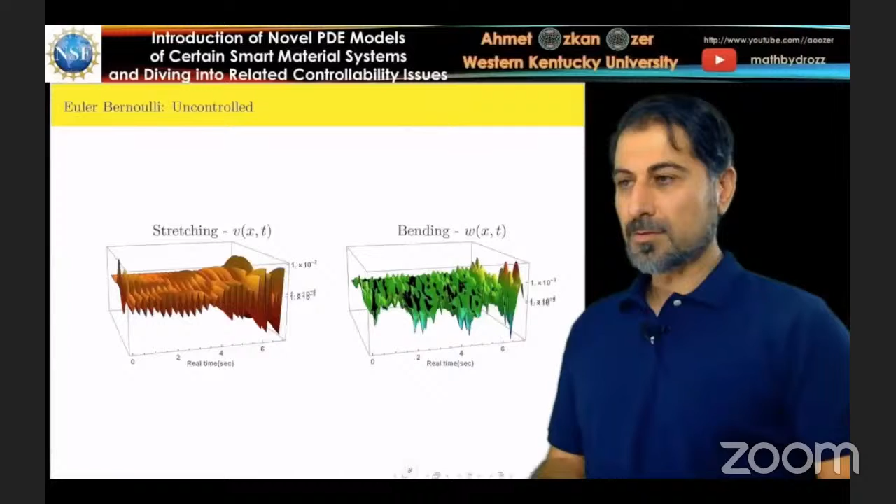So here's some numerical stuff going on here. If you have an uncontrolled Euler Bernoulli beam, as you see, it's a mess, so there's no control going on here. So V and W are just fluctuating all the way.

And if you have a fully controlled model, essentially you have V, M, and G, all three controllers. As you see, both stretching and bending motions are controlled perfectly here.

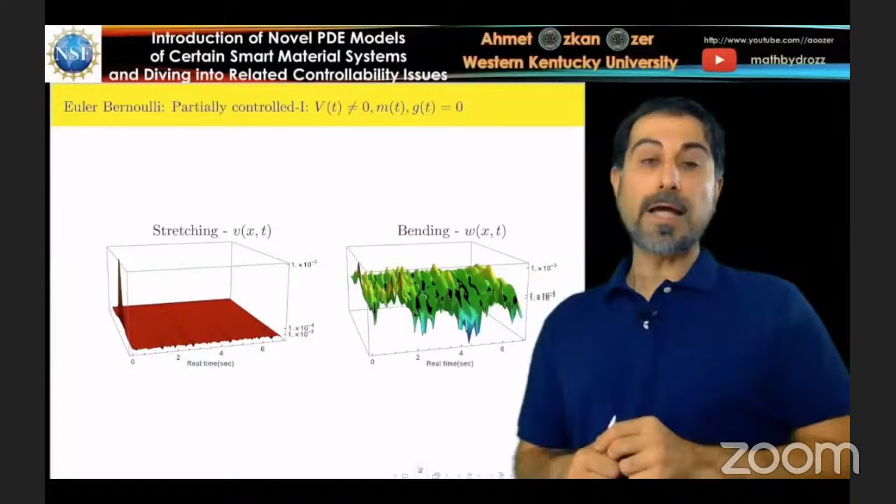If you have partial control, for example voltage is non-zero but all other bending, transverse shear, and moment controls are zero, so you have only voltage essentially. Voltage handles the stretching pretty well as expected, but it doesn't control the bending motion at all. And if you have M and G, you control essentially the bending equation but not the stretching equation, because we have V voltage to be zero. So stretching is not controlled at all, but bending is controlled. So you need at least two controllers to make the system stabilizable, because voltage alone is apparently not enough.

And you have the tip velocities here: with no control, you have a lot of fluctuations going on. With controlled tip velocity, you have a very good result here, so V dot, essentially the tip velocity, is just decaying to zero pretty fast.

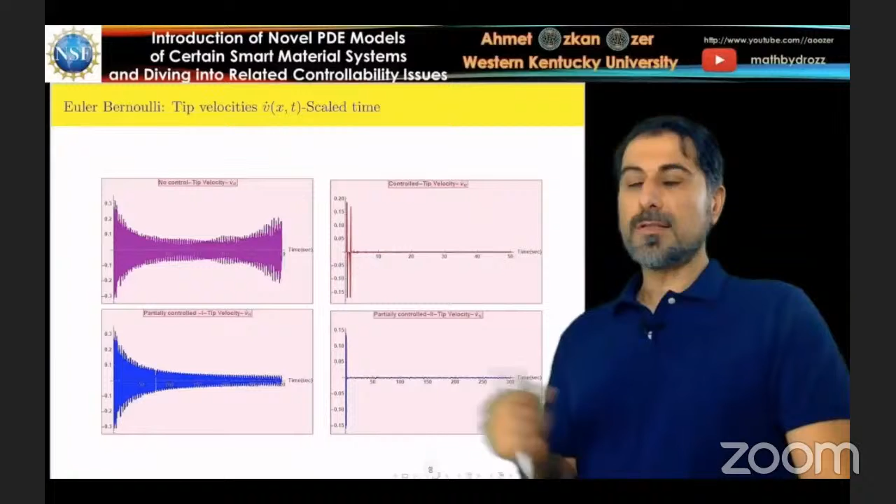And if you have partial control type 1, so you have essentially bending equation controllers only, you can't control V dot, as you see in the tip velocities. But if you have only voltage control, tip velocity is good, but this time you can't control the bending motion. So you need at least two controllers - that's the sort of catch of that.

And the same thing with the W dot equations, essentially. If you look at the normalized energies, the best case here is the both-controlled case - the decay is almost exponential, as you see. But if you look at no control or the partially controlled number one case, these are not good cases at all - there's some sort of decay, but not exponential, obviously. And voltage control is very strong because it has an effect on both stretching and bending.

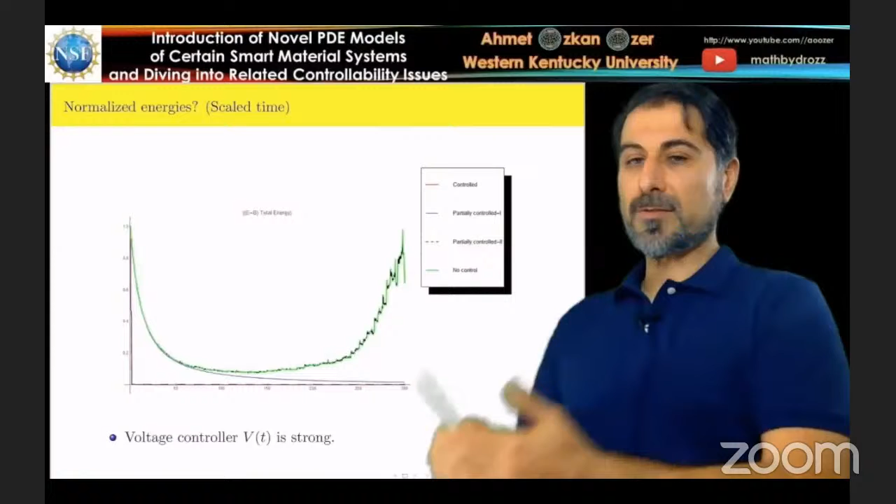And you pretty much observe the same type of pattern in the Rayleigh-Timoshenko case.

All right, let's change gears a little bit. This time I'm going to talk about the numerics for infinite dimensional systems. Working on the numerics for infinite dimensional systems is important because most of the time the control design is infinite dimensional, but in practice we have to reduce those down to a finite dimensional model, so the control design is finite dimensional. So we're going to be very careful with that.

And the toy problem that I picked here is the Rayleigh beam equation. This is a published work, but there is more work coming along with that. The reason why I present the Rayleigh beam equation is just because it's easy to present. All right, let's move on with that.

Observability. So here we go. We have the Rayleigh beam equation, and we choose the hinged boundary conditions to make our lives easier. This boundary is controlled by a controller U of t. So essentially we're controlling the moments at the tip of the beam, and we have all the material constants positive. So what I'm going to do next is rewrite this term, then we have this operator so that we can convert this differential equation into the first order form. And now we choose the states to be W and the time derivative of W, so that we have this system operator. As you see, we're supposed to invert this matrix.

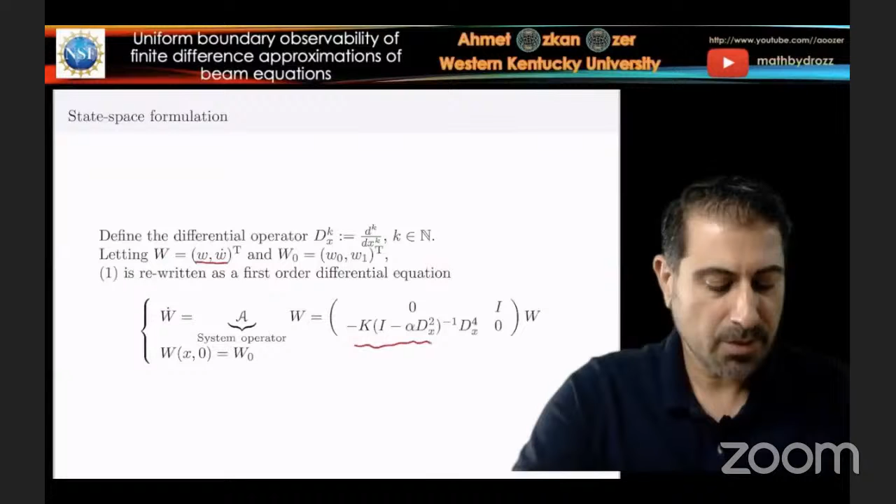Now we're going to define the solutions in the higher order energy space. We're going to define the inner product, and in fact the inner product induced norm. And then we have the following result: we prove that if T is greater than twice the length divided by the speed of wave propagation on the beam, then we prove observability, which essentially means that if you measure the third derivative at the tip of the beam for enough amount of time - so t must be greater than this number - then we have this observability inequality holding true. So essentially, this means that the PDE model is exactly observable.

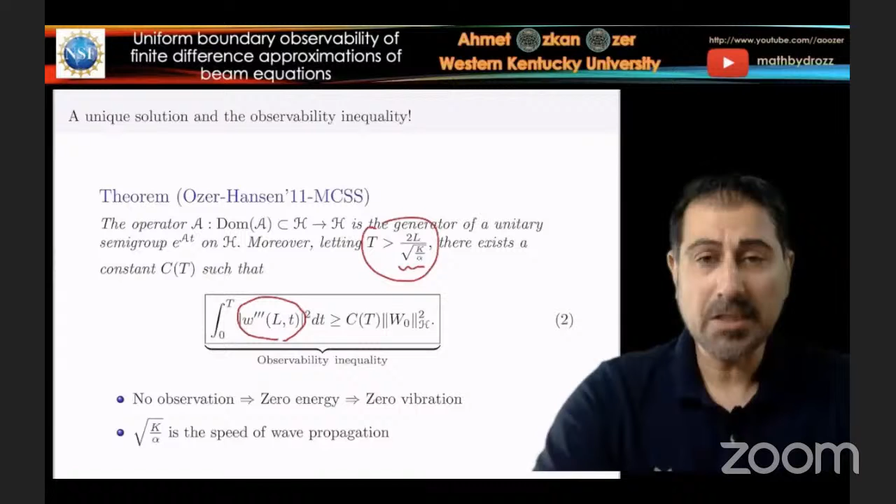Now I want to go back to the differential equation model here. So this is a partial differential equation, and this is an infinite dimensional model. And if you were an engineer and you would like to design a controller or an observer, you would have to discretize this model so that you would reduce this infinite dimensional model to a finite dimensional model. So interestingly, if you apply the known approximation techniques, many things fail substantially.

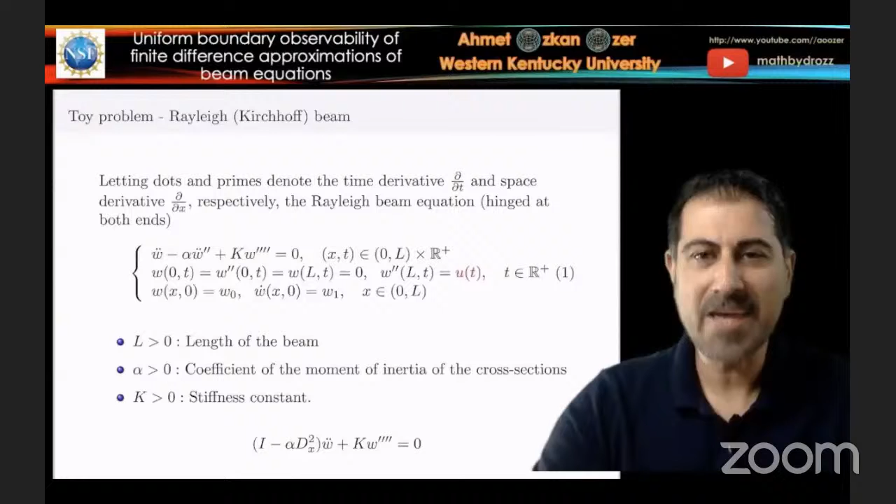I'll show you one of the results where they used many known techniques, and those known techniques fail to mimic the observability properties of the PDE. This is the paper by Banks and Wang, please refer to that.

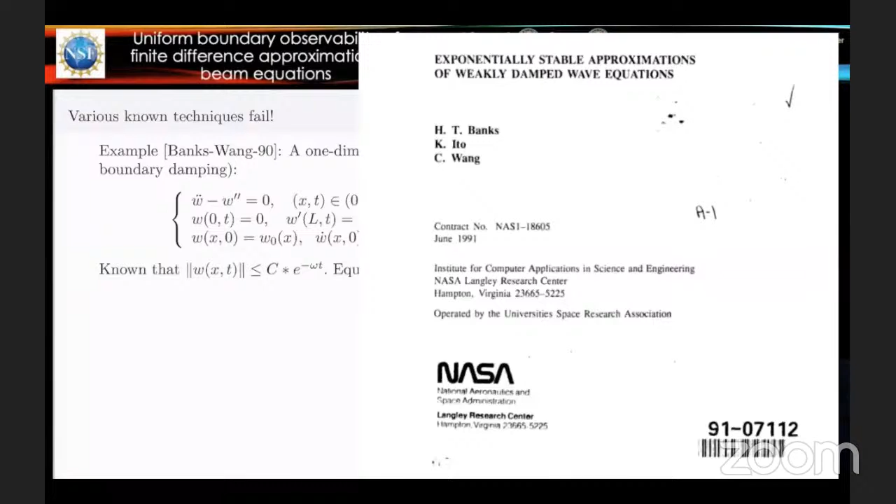They considered a simple one-dimensional wave equation describing vibrations on a string, clamped on the left end and free on the other end, but the free end is controlled by a controller measuring the tip velocity and feeding it back to the right end boundary condition to make all solutions exponentially stable. It's a known fact that these solutions are exponentially stable, and all the eigenvalues are shifted to the left half plane.

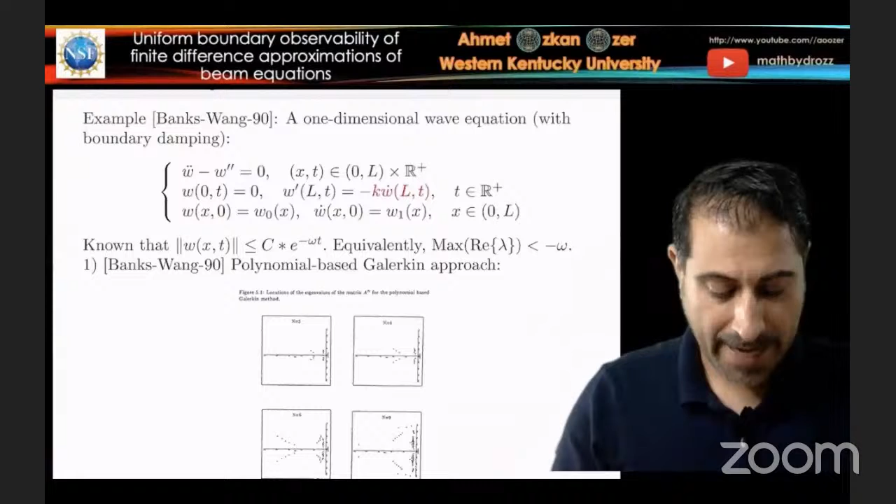The first technique they practiced was the polynomial-based Galerkin approach, and if you increase n from 3 to 9, you still have eigenvalues getting a little bit closer to the imaginary axis. I would assume there is some kind of uniform gap between the maximum of the real parts of the eigenvalues and the imaginary axis.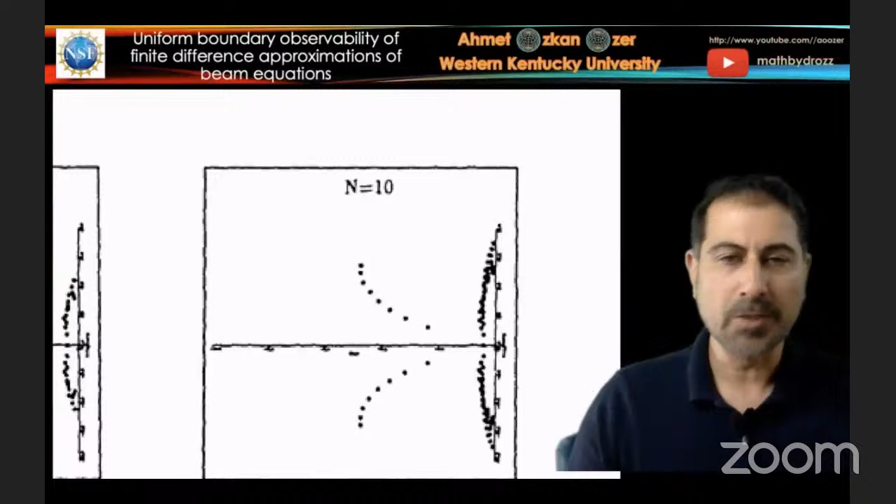The next numerical technique they practiced is the linear spline-based Galerkin approach. When n equals 10, there is no uniform gap between the imaginary axis and the maximum of the real parts of the eigenvalues. They also tried the cubic spline-based Galerkin approach, and the situation is the same.

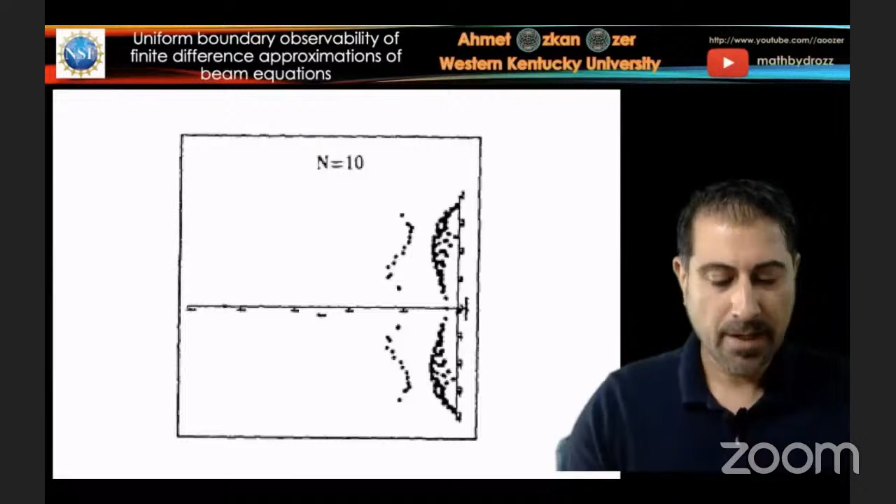Failure is substantial. In the fourth approach, they used the finite element approach, which is a pretty widely used approximation technique, and the situation is even worse. Remember, in the PDE setting, we have a uniform gap between the real part of the eigenvalues and the imaginary axis, and that's why we get exponential stability with a fixed decay rate.

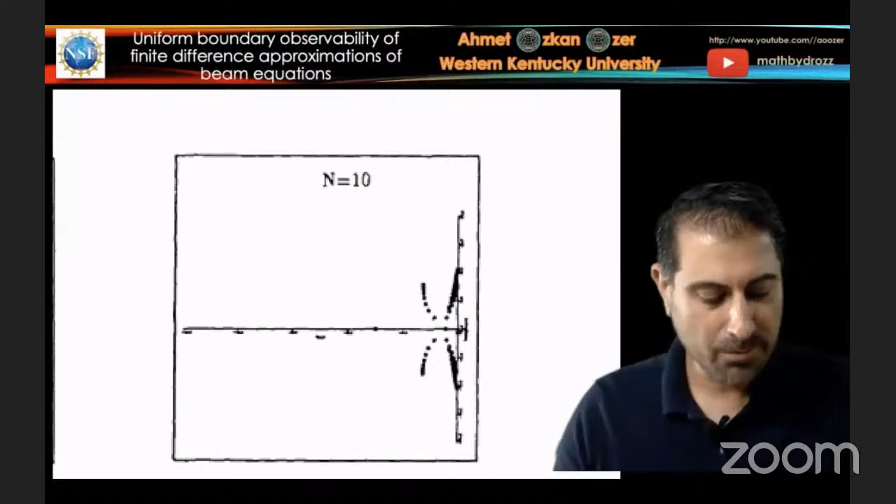Here is the finite difference approach, which is another easy technique to apply. This situation is even worse, so eigenvalues get extremely close to the imaginary axis.

At the time of publication, the authors didn't realize what the problem was, because these are known techniques. The problem was simply due to the eigenvalues of the control-free problem in the PDE setting. Those eigenvalues have a uniform gap, which is a well-known fact because you're talking about the wave equation.

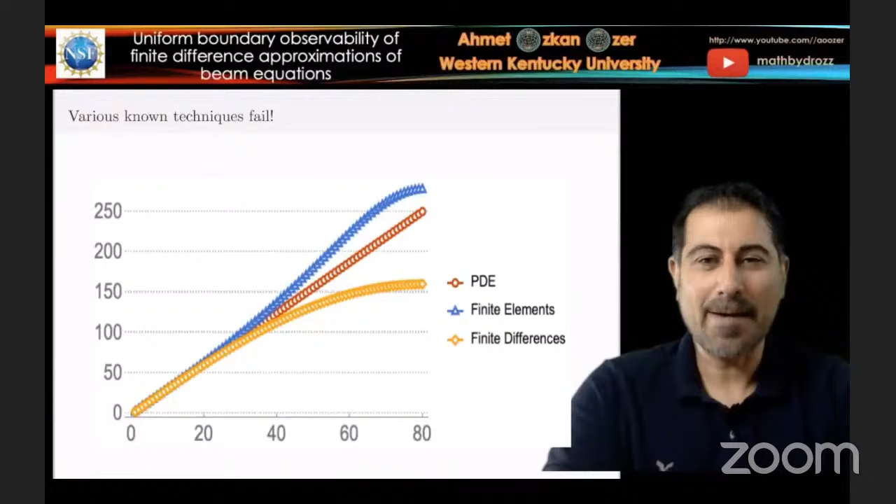But when you look at the reduced models and their eigenvalues, you realize the eigenvalues flatten out as you go to high frequency eigenvalues. That means for high frequency eigenvalues, the uniform gap is lost. In fact, the gap approaches zero as the mesh parameter goes to zero. So that was the problem.

Now I'd like to quickly talk about the remedies proposed in the literature. The first is called the filtering technique, and that has two different ways. In the direct filtering technique, you just cut off the high frequency eigenvalues starting from a threshold number you pick, then discard the high frequency ones and continue with the leftover eigenvalues and eigenvectors.

If you want to work with higher frequency eigenvectors, you can let the mesh parameter go to zero, so you have more eigenvalues in the list, and then cut off from the higher number. That's what direct Fourier filtering is about, and I'm going to talk about that and the results I'm going to use today.

In the indirect filtering, you essentially add a viscosity term to the PDE with a mesh parameter in front. When you let the mesh parameter go to zero, the viscosity term helps stabilize the solutions and mimics the solutions of the PDE problem, and as h goes to zero, that term disappears and you get a good convergence result.

You also have the mixed finite element approach, which is pretty good, and some researchers worked on that. There's a 2-grid algorithm, and there's also a paper that just came out using the finite difference method without filtering, without a viscosity term, or without Fourier filtering—that's an interesting paper, you can check that out.

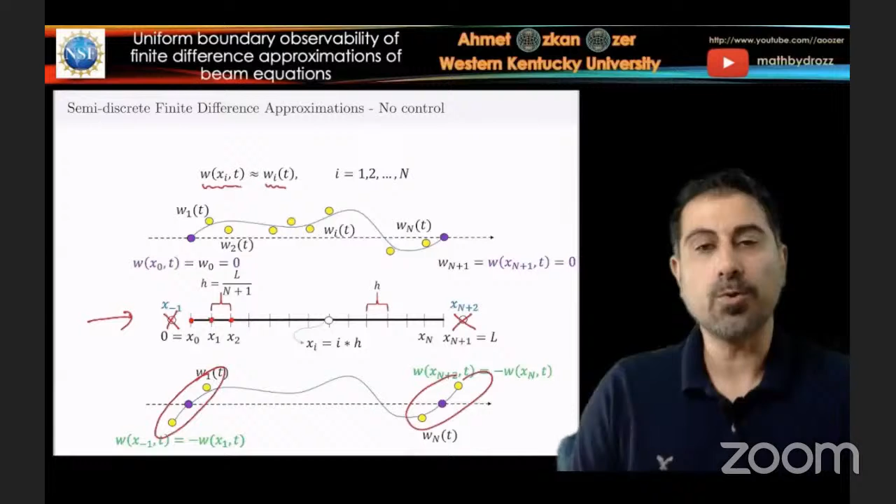Now we approximate the second and fourth derivatives using central differences, so that we have a system of differential equations with homogeneous boundary conditions on the left and right, together with the antisymmetric boundary conditions. We want to come up with the eigenvalues of this system, but to achieve that, first we need to solve an auxiliary eigenvalue problem, which is the negative second derivative operator approximated by the central differences. So we first solve this eigenvalue problem.

If you write that in matrix form, you are looking at the eigenvalues of a tri-diagonal symmetric matrix. This matrix is positive definite, so you can list the eigenvalues from lambda 1 through lambda n. It turns out that we can list the eigenvalues and eigenfunctions of AH explicitly, analytically. The eigenvalues follow this form, and eigenfunctions follow sine type form, which is expected because the original PDE problem has sine type eigenfunctions.

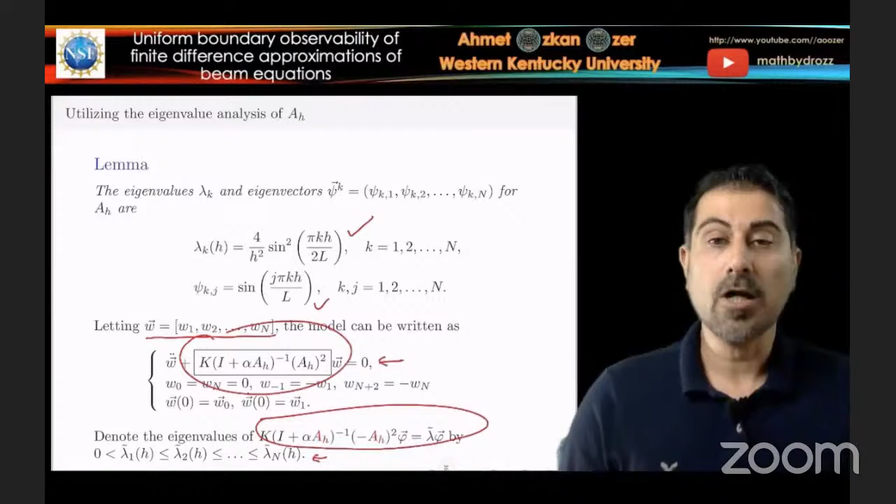Now we let this vector be our state, W1 through Wn, and we convert the discretized Rayleigh beam equation to this form. Next, we try to come up with the eigenvalues of this boxed matrix. That matrix is positive definite, and we know that all the eigenvalues are positive. Here are the eigenvalues and eigenvectors of that matrix.

We have k over alpha that has something to do with propagation speed, and this is lambda kh, the eigenvalues of the matrix AH. We have the tail coming along, and the eigenvectors follow the same form as in the case of AH, like this one.

We can normalize the eigenvectors with the normalization constant. It's easy to prove that lambda kh, the eigenvalues of AH, times h squared is less than 4. We can also prove that lambda k twiddle h squared is less than 4 times k over alpha for all h positive. Also, if you consider the last eigenvalue of this matrix, that eigenvalue times h squared converges to 4k over alpha as h goes to 0.

Now let's get to the bottom of the problem that was first observed in 1990, which I mentioned at the beginning of the talk. We're plotting the radical of the modulus of the lambda twiddles for k and alpha to be 1, so the wave propagation speed is 1. We have the eigenvalues of the PDE problem; there are infinitely many, but they follow a linear pattern.

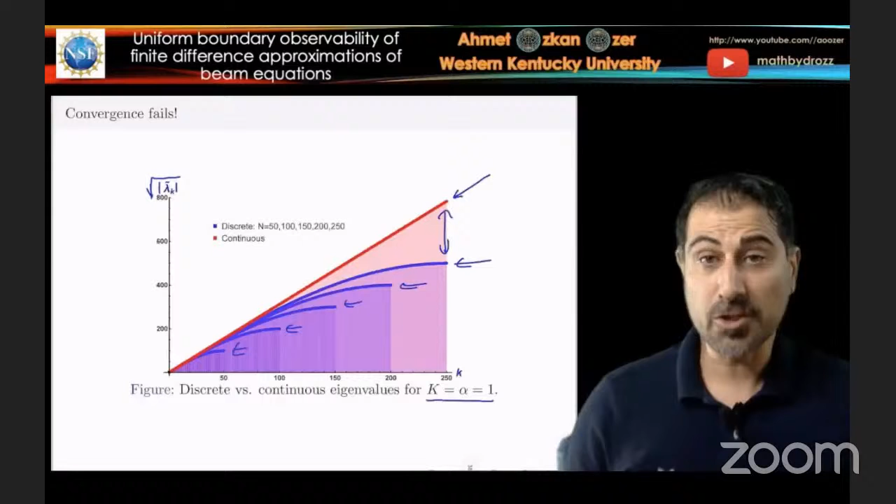But the question is, is that the only issue? No, that's not the only issue, because if you look at the uniform gap between two consecutive eigenvalues, you can observe that the gap converges to 0 as you increase n, considering the high frequency eigenvalues. When the uniform gap is lost, you can't talk about the observability inequality. In fact, you can show that as h goes to 0, the gap goes to 0. For that reason, not only do we lose convergence, but also the uniform gap condition that the Rayleigh beam equation has.

You can pick a solution of the discrete problem and show that for that type of solution, you lose observability. Essentially, the observability constant tends to infinity as h goes to 0, whereas we proved in 2011 that the original problem is exactly observable with this optimal control time. This result shows that we proved the lack of observability of the discrete model because we simply applied finite differences blindly, whereas the original problem is exactly observable.

Now let's filter the high frequency eigenvalues and eigenvectors, because these were the ones causing the lack of observability. Here is gamma, our filtering parameter. It's between 0 and 4, and we consider the filtered solution. So essentially you fix gamma to a value between 0 and 4.

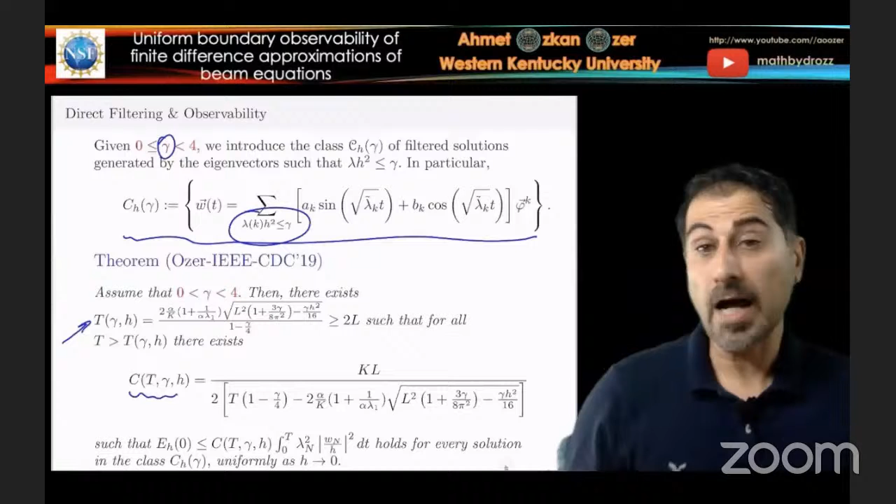Essentially whatever gamma is, you're going to keep a certain number of eigenvalues, and for those solutions you can easily prove that the finite dimensional system is exactly observable with this observability constant. Notice that the observability constant depends on the filtering parameter, and the observability time also depends on the filtering parameter. So we can actually run some experiments here.

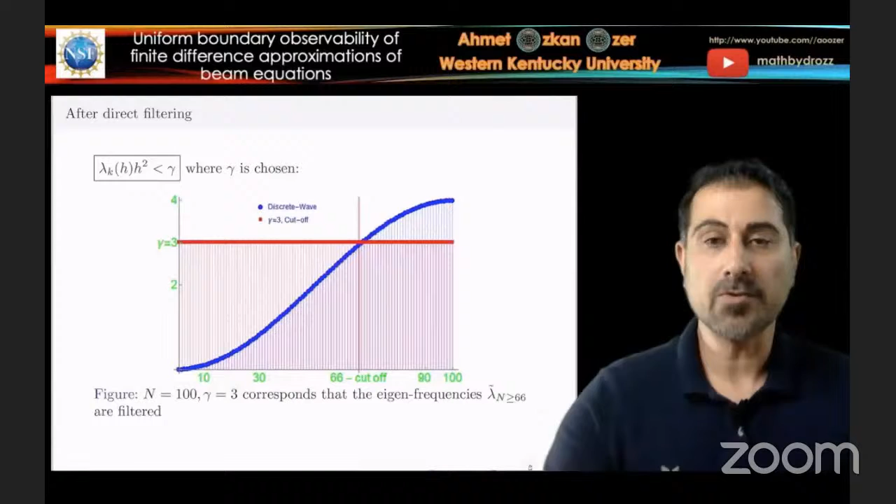So we can choose gamma to be 3 for n equals 50. That means we're going to retain only 33 eigenvalues. If you choose n to be 100 and gamma still to be 3, the cutoff is done at 66, so we keep the first 65 eigenvectors. If you want to keep high frequency eigenvectors in your solution, you need to increase n, and you need to choose gamma between 0 and 4 to retain those high frequency eigenvalues and eigenvectors.

Here is the Wolfram demonstration project, already available on Wolfram's website. This one is specifically for the Rayleigh beam and Euler-Bernoulli beam, and for your reference we have another one for the wave equation with boundary damping, where we also use the filtering technique. This demonstration project is more about the design of the feedback controller using the observation, so it's very connected to what we have been doing so far, but we're using a different type of filtering.

In fact, we added a viscous damping type filtering to the equation to suppress the vibration. So just so you know, this is sort of like a representative example. We also have a demonstration project with direct filtering, but I think this one is already available, so I wanted to present this one.

So here we have the Rayleigh beam or Euler-Bernoulli beam, which we can pre-select. We have the filtering either 0 or 1, and n is the number of nodes in the discretization—as you see, we have 20. We already have filtering 1, so we're talking about the filtered solutions in the next simulation. We have the viscous damping, and no boundary damping for the time being. We have the normal mode displacement, and we got the 15th eigenfrequency mode as the starting point, as the initial condition, without initial velocity.

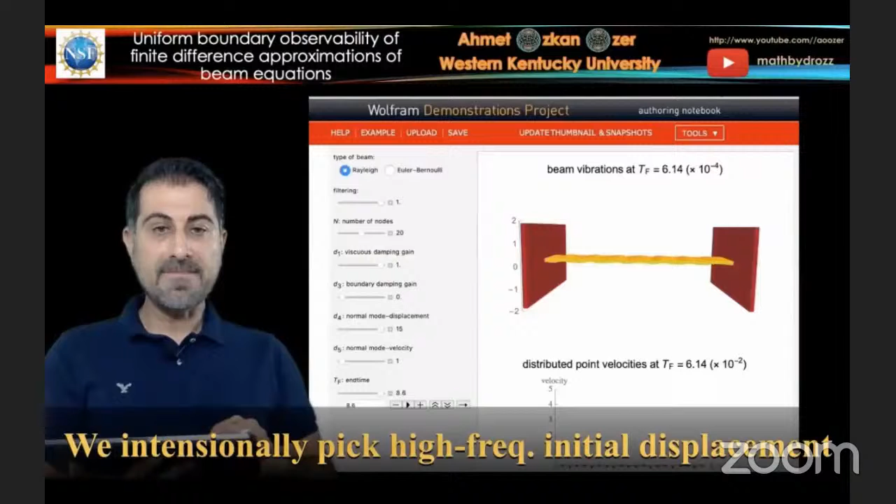Let me just start the demonstration. With the viscous damping, we have a really fast decay. Now we are going to choose another version of this: we have the filtering, and this time we have the boundary damping. We have a pretty fast decay as well.

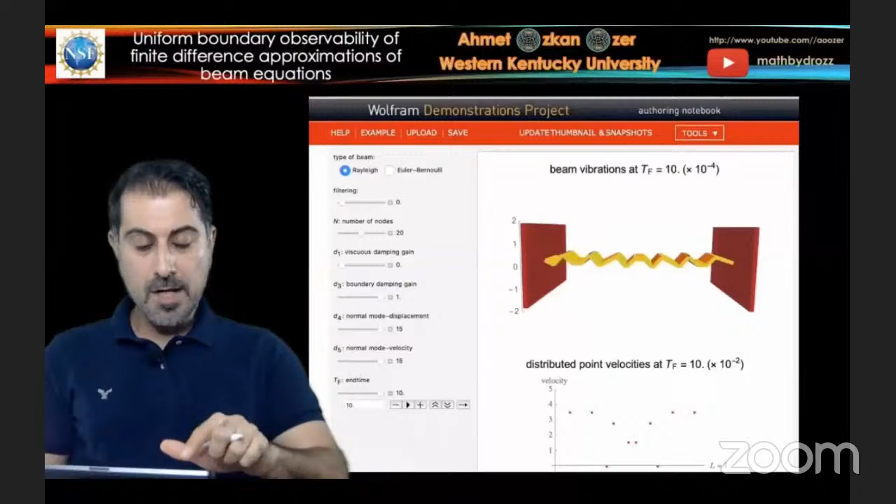The next case is that we remove the filtering. We still have the boundary damping, just so you can see the difference between filtering and non-filtering. Essentially the solutions are not really decaying to 0.

With n equals 20, I got the 20th node, the very last eigenfrequency mode, as the initial condition. Let's see what's going on here. As you see, we have the filtering on right now, and we have the exponential decay of the solutions, even for the highest frequency solution.